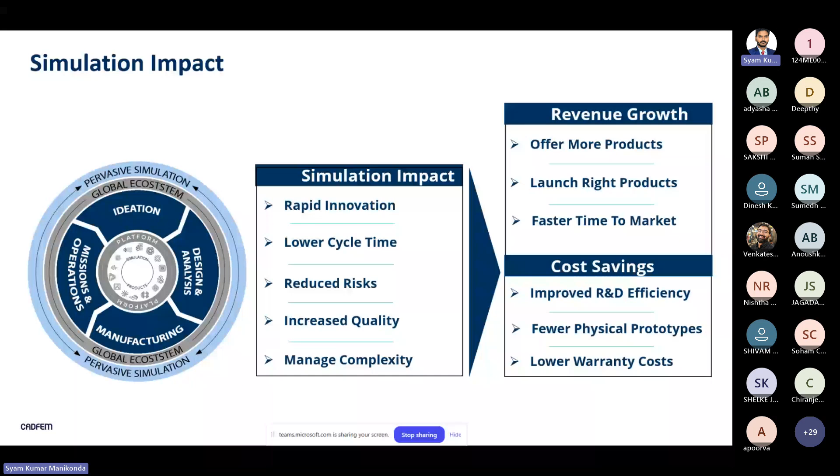You can see the simulation impacts there. The line items show it will help you with rapid innovation, reduce your manufacturing cycle times, and even risks can be reduced. Then quality of your production can be increased, and a variety of complex parts you can manage. Ultimately you will improve your revenue and save money costs incurred in it. These are the basic things you can understand.

And this is another design, a totally new design: the Air Multiplier from Dyson. It's a new design of table fan, you can say it's a bladeless fan. What it does is pull air into the ring and amplify it by a further 15 times, so airflow can be improved, giving strong and smooth airflow. It's an expensive thing because it's a new design and there is no background before this particular design.

So what I'm saying from this slide is that any kind of new design also you can develop using simulation. You don't need a history of the existence of that particular part. You can start doing your product very innovatively without having any previous existence of that particular model.

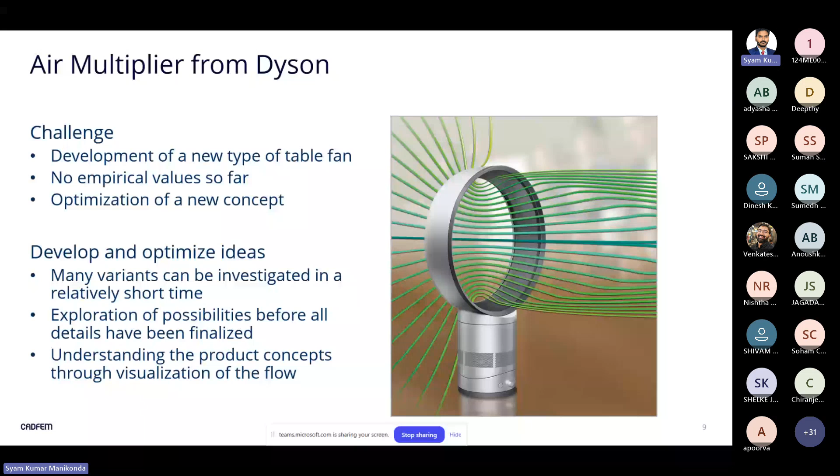Let's say you have a virtual development process. Generally it will have 3 stages. We start with the drafting of that particular design or model. Once you've done the model, you have to do the validation, meaning you need to check whether it is functioning properly or not, virtually, since it's a virtual development process we are telling about. All the things will be done virtually using your simulation platform, particularly Ansys. So drafting and validation.

At the end, you can do the integration also. Ansys is providing the option of integrating your virtual model using your real world data. And these are the tools in your virtual development process. If you correlate this previous slide and this slide: drafting, validation, integration.

For drafting, we have Ansys Discovery. It's a new tool for designing or modeling. Not only Ansys Discovery, we have other tools also: SpaceClaim is another one, and DesignModeler is another one. So we have 3 different tools for drafting your model.

Coming to the solver or validation purpose, different tools are there based on the physics: structural physics, electromagnetics physics, then fluid physics. All those physics-relevant tools we are having. So Ansys is offering solver tools based on the physics of what you are dealing with, and we have the tools for validation. Coming to the twin builder, this is a twin builder which will be used for integration of your virtual prototype by means of real world sensor data.

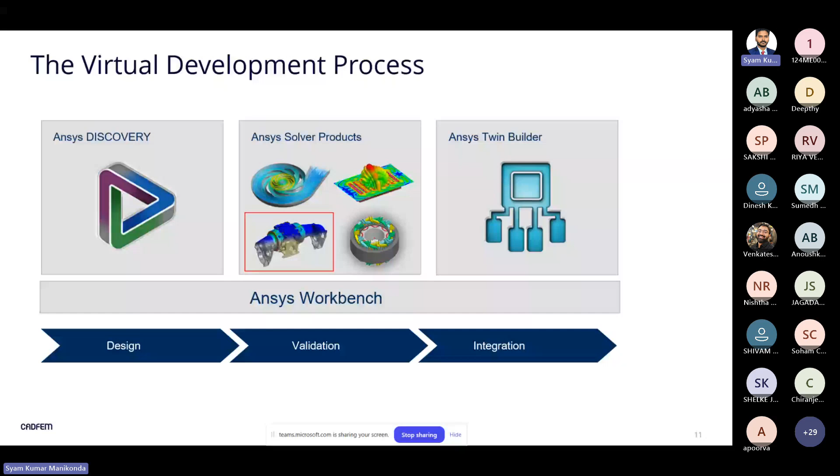So implicit means, hopefully you might be knowing implicit simulation, implicit analysis means analysis or problem duration will be longer, like static problems, dynamic problems, creep problems. All these kind of problems we will say are implicit simulation, implicit analysis. So we could utilize Ansys mechanical for performing implicit structural mechanics problems. Just remember, mechanical is a tool used for doing implicit structural simulations, examples being statics, dynamics, and creep problems.

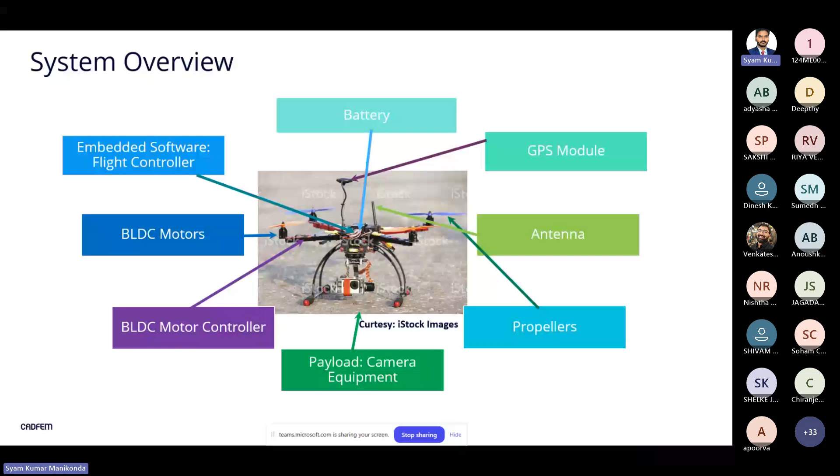But why I'm showing this is because this is an overview of your quadcopter system, but we will be sticking to a different aspect here. There are different engineering challenges you can have while designing a particular drone or unmanned aerial vehicle. Different engineering challenges will be there based on the physics, with respect to body, reliability, semiconductor, sensors, functional safety and reliability.

We'll be focusing on these engineering challenges with respect to structural integrity, so we'll be using our structures. You can have the structure made of different composites, and we could do the aerodynamic studies on that particular structure. But I'm not going to focus on this aerodynamic study and noise this time; a different session will be there on the aerodynamics of this particular structure.

Before going to our main demonstration, we need to cover a few things on finite element method. Finite element method is nothing but a numerical method used to solve a particular problem. For any engineering problem, there are generally two ways of solving: one is the on-paper solution, that means analytical method, using equations and solution methodologies you can perform on paper. But there are many engineering problems you can't solve on paper, so for those kinds of problems we have to use numerical methods, and finite element method is one such numerical method.

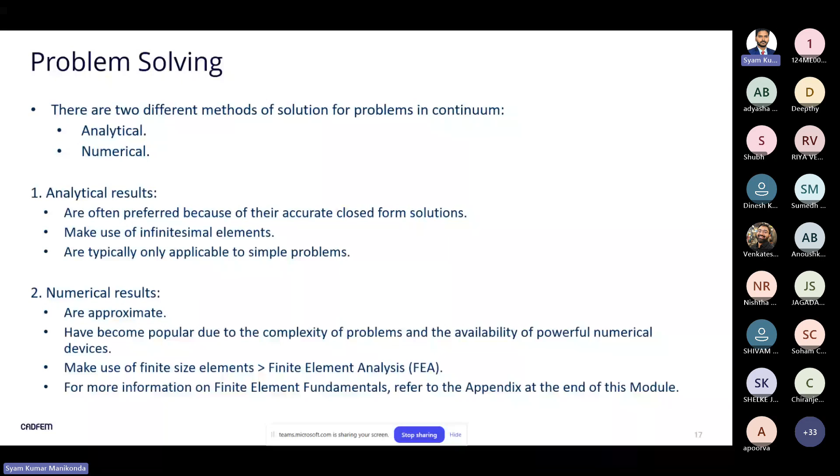So in FEM, what happens? FEM is a numerical method used to solve particularly complex engineering problems, not simple ones. We utilize numerical methods for solving complex problems. Generally, this complexity is associated with respect to the geometry, loading, and boundary conditions. That is the meaning of the complexity of your particular engineering problem.

Each element will be surrounded by corner points, and those points we call nodes. So what I'm saying is, in finite element method, the main point is the entire domain under our observation will be split into small pieces. Each piece will be called an element, and each element will be surrounded by nodes.

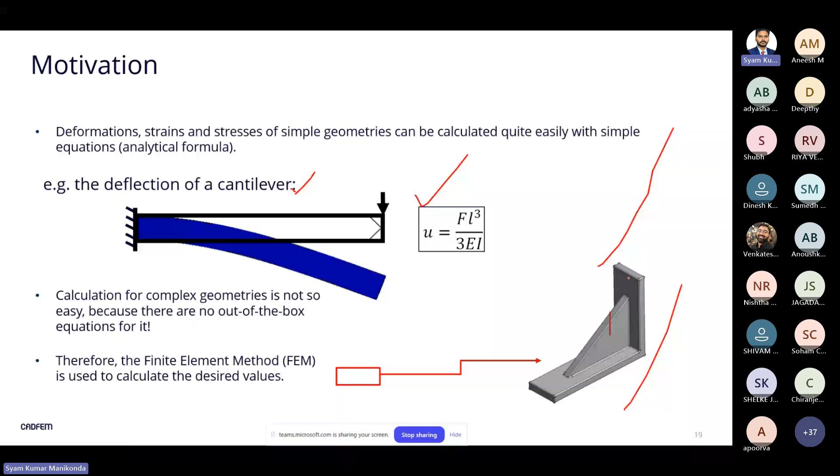So in finite element method, it will have some three basic equations similar to the solution based on analytical method. Even the numerical method will follow the three equations: equilibrium equations, kinematics and material law. That means there will be some relation between strain and displacement, and stress and strain. So equilibrium equations it has to follow, kinematics - nothing but strain and displacement relation - and material law, stress and strain relation.

So when a bar is subjected to force F, we know the elongation formula: elongation is FL by EA. After rearranging a few terms - keeping force on one side and the remaining things on the other side - you will be getting in this form. And from this, EA by L, I can make it as K. So this K multiplied by displacement is equated to force. You need to remember this equation - this is a finite element equation.

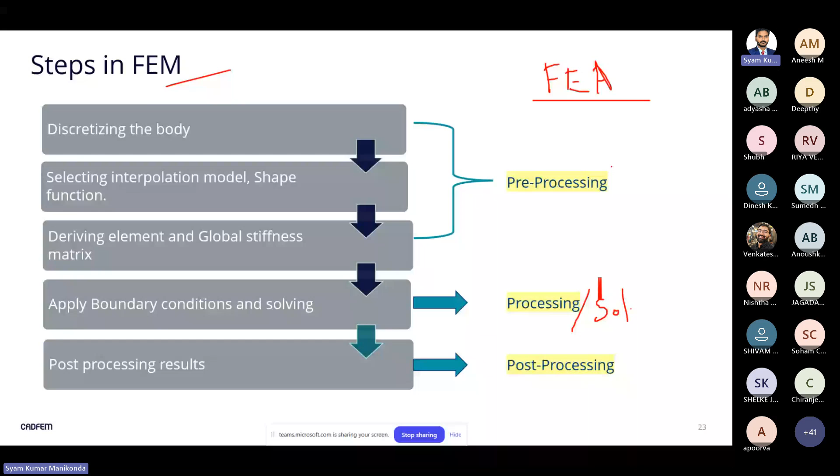Coming to elements, as I mentioned, a problem domain can be split into small pieces, and each piece is called an element. This is based on the geometry of your domain, that is, whether it is a 1D, 2D, or 3D domain. So we will have different types of element terminologies.

So we have 1D beam elements, 2D triangular and quadrilateral elements, and in 3D, tetrahedron and hexahedron elements. Since we are going to demonstrate on a 3D geometry, you should remember these: tetrahedron elements, hexahedron elements, and pentahedron elements, also known as wedge-shaped elements.

So tetrahedron elements have triangular shapes, hexahedron elements are like a cube, you can remember it as a cubical element, and wedge elements. Just focus on these 3D elements.

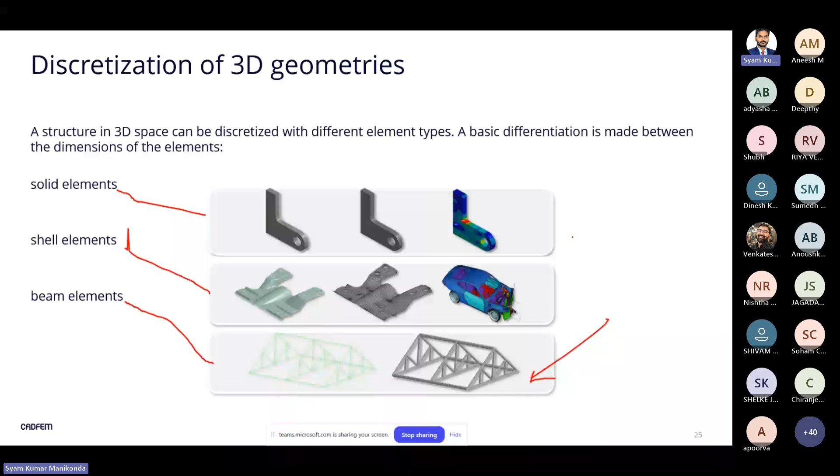There will be some assumptions behind identification of solid, shell, or beam elements. Let's see about those assumptions. Any 3D object can be converted into a 2D object if it satisfies a few assumptions.

Generally, any engineering problem is 3D only, not 2D or 1D. But if it satisfies a few assumptions, then such a 3D object can be treated as either 2D or 1D. So any 3D object can be converted into a 2D object if it follows some assumptions.

When can I say a 3D object can be treated as a plane stress state? If your 3D object's thickness is very small, meaning a thin structure, and the loading is on the plane, like a plate being stretched, meaning the loads are along the plane with no loads perpendicular to the plane, and the thickness is small, then such a 3D object can be treated as a plane stress state.

Stress components perpendicular to the 2D plane are negligible, meaning there are no loads in the perpendicular direction of that plate. In such cases, we can treat that 3D object as a 2D object and name it a plane stress state. Examples of this would be beams, plates, shells, and membranes.

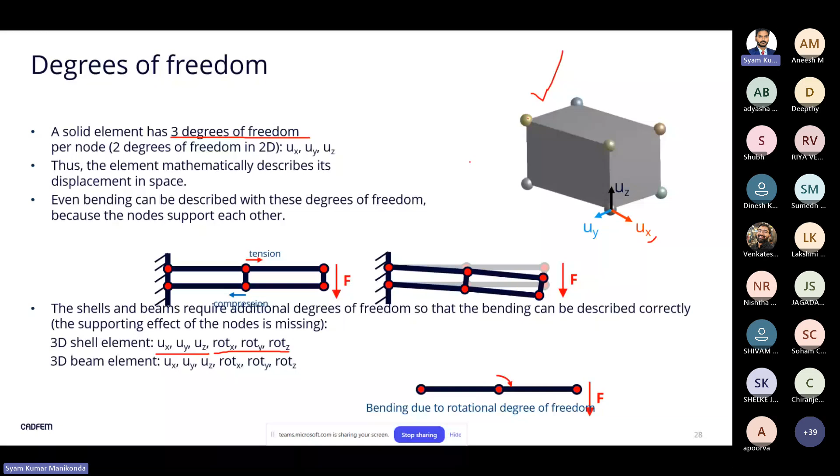Then there are some advantages and disadvantages. Disadvantages means if you have a good hardware, these are not disadvantages. Advantages means any kind of complex geometry can be tackled. Any kind of nonlinearity, whether it is nonlinearity in material or geometry, can be handled. And any kind of boundary condition can be applied. Commercial codes can handle a general class of problems rather than requiring different programs for plane, axisymmetric, and 3D cases. So a good software can deal with any dimension, whether it is 1D, 2D, or 3D. A single software can handle these 3 different domain case problems.

Disadvantages means, the first thing is it is a numerical method based, so FEM is a numerical method, so the solution will be approximate. They are not accurate always, they will be approximate. The solution is numerical rather than analytical. So significant computational resources are required, because if you are having so many number of nodes and elements, then definitely you should be having a good software, a good hardware.

A large amount of input data may need to be stored. Why? Because if you have a large number of elements, you'll definitely need lots of memory to be utilized, and a large amount of output needs to be stored too. That is also one requirement for having good hardware when handling big problems. A simple hardware setup cannot handle a big, complex problem. That is what the disadvantage means.

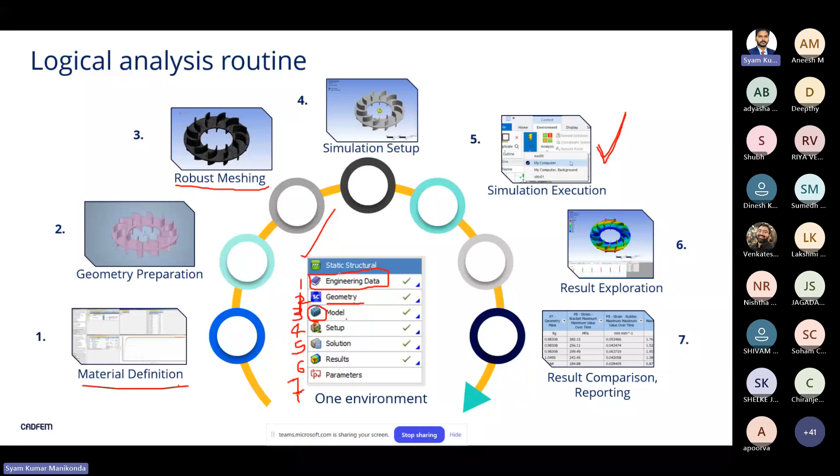Now I'll show you the same routine in a different view. So what we will do is call the analysis. We have to call a static structural analysis and follow all these cells correspondingly. For this I will be going to the Ansys workbench, open it, and I will be having a project page.

There I have to identify what type of analysis I'm doing. Based on the mechanics, temperature involvement, and static and dynamic cases, accordingly I will identify the type of analysis. That can be done using the Ansys workbench project page. Then again, material definition is the first cell, and geometry import or geometry creation is the second step.

Then file management. Once you input the material, once you call the geometry by means of importing, then the CAD model is ready. Once the CAD model is ready, we will be jumping into the Ansys mechanical, that is the third step, the third cell. So the first cell is material definition, second is geometry import, and third is the model.

So if you open the third one, the model, you will be redirected to Ansys mechanical. There you have to assign the material property. Earlier you defined it, but you have to assign the materials corresponding to the parts of the geometry. If you are having any thickness, you have to mention it here. If it is a 2D geometry, you have to mention the thickness here.

Then some simplification on the geometries may be required, such as defining point masses. Sometimes connections also you have to provide, so joints and contacts are called connections. Then again discretization, that is nothing but the meshing. Just remember, discretization means it is nothing but the meshing.

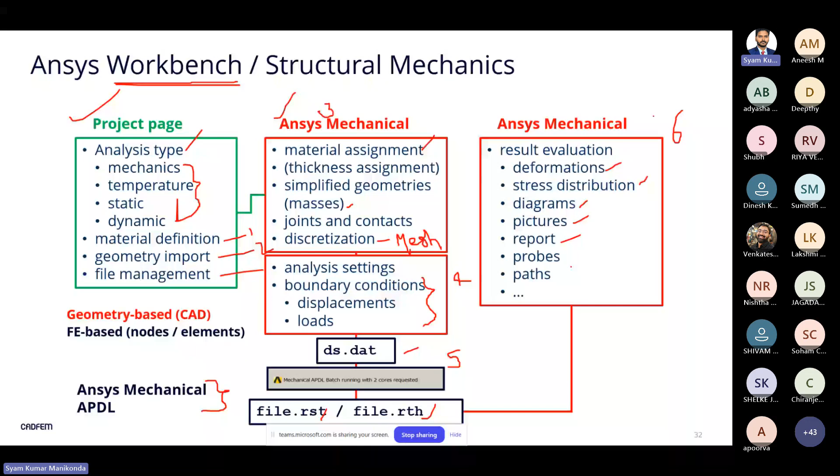Then coming to the different types of structural analysis that we are having. As I told you, structural analysis has two varieties: implicit structural analysis and explicit structural analysis.

In the same way, depending on the time frame of the problem, there are different classifications: statics problems and dynamics problems. Statics problems means the loads will not vary with respect to time, and dynamics means the loads on the structure will be varying with respect to time. So statics does not depend on time, whereas dynamics, the loads will be depending on the time.

Again, based on the linearities and non-linearities involvement, we can classify linear and non-linear. Coming to dynamics, all the cases will be mostly linear dynamics cases.

In dynamics cases, again, based on the domain - frequency domain or time domain - we are again having a split. In dynamics, what we generally have is displacement, velocities, and accelerations. If some certain assumption is there on those three things, then that domain we say is a frequency domain. If that assumption is not there, we say it is a time domain.

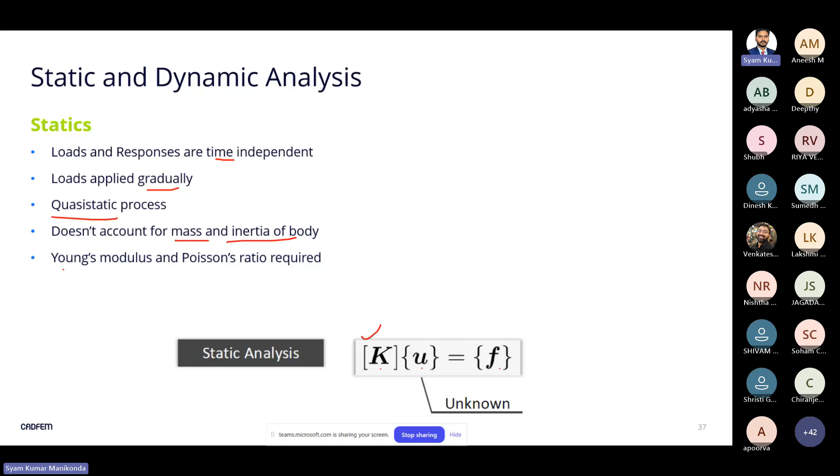So what are the features of this static analysis? Loads and responses are not depending on time, loads are applied gradually in a quasi-static process, and it does not account for mass and inertia effects. From the equation you can understand there is no involvement of density or mass - strictly mass and inertia of the bodies are not required in static analysis. Material properties will be Young's modulus and Poisson ratio - these two things we definitely need to include. So that is about the static analysis.

Coming to the dynamic analysis, the equation is not simple. Earlier if you see the static analysis, it's a simple equation, but here in the dynamic analysis, it's not a simple equation - the complete equation is this one.

So it will have masses, it will have damping, along with stiffness, displacement and forces. It will have mass and damping matrices. That means inertias and damping forces will be involved.

If you see the forces, since it is a dynamic case, the loads will be depending on time. That's why the force has dependency on time. So in a dynamic situation, loads will definitely be depending on time.

Mass and damping of the system is considered, that is m into u double dot plus c into u dot. So that is the mass and damping of the system. Density of the material is required because mass is existing. That's why density is required in dynamics problems.

Problems can be classified in two ways: frequency domain and time domain. Frequency domain means you will be having some assumption on displacement, velocity, and acceleration. That type of assumption will not be there in time domain problems.

In frequency domain, we have different cases: harmonic, random, and response spectrum. For all these cases, you first need to perform the modal analysis, that's the free vibration analysis you have to perform.

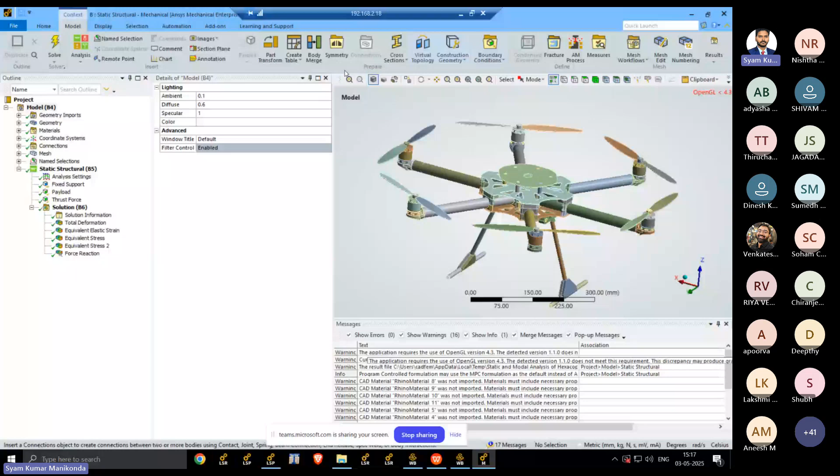So this is an object, and we have to perform the static structural analysis. Those load cases I already showed you in the slide. Let's see how to create this entire environment - I'll show you. Let me close this. Already I have solved the problem, I'm just showing it to you. Again I'll construct everything from scratch.

So first of all, what we have to do is call Ansys structural - sorry, Ansys mechanical. We need to open Ansys mechanical. So once the software is installed, you need to open the workbench.

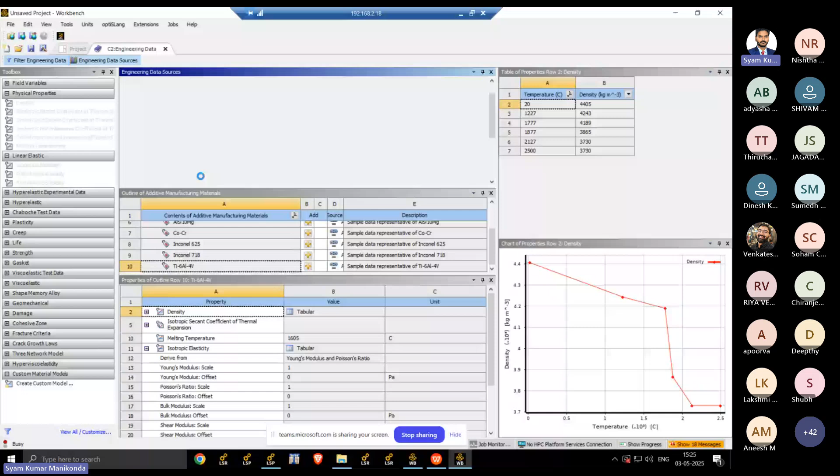Then coming again to composite materials. Even composite fibers are there -- different e-glass materials, epoxy, laminate materials. In the composites material category, you can see around 30 different types of composite materials.

So what you can do, if you want to go with carbon fiber, you can simply bookmark it, and that will be taken to your engineering data.

Again, in the same way, if you are doing any LS-DYNA problem, or maybe an explicit case problem, accordingly explicit materials are there -- you can see the materials for the library of explicit materials. In the same way, fluid materials, thermal materials -- all those materials you can simply select by means of the plus symbol here. Accordingly you can utilize the variety of materials existing in the Ansys libraries.

And again, Ansys Granta is a different library -- you can see the name mentioned here, it is a sample thing. Ansys Granta offers you 700 libraries of material data, but right now it is a sample data that has been added in the engineering data here. So Ansys Granta material data is a sample data given here.

A wide variety of industry available materials can be obtained from Ansys Granta, and here we are provided with some sample data -- 41 different sample materials are there from Ansys Granta. If you have Ansys Granta with you, 700 varieties of libraries you can access, and there is a separate selection criteria accordingly. Likewise you can identify the different classes of libraries.

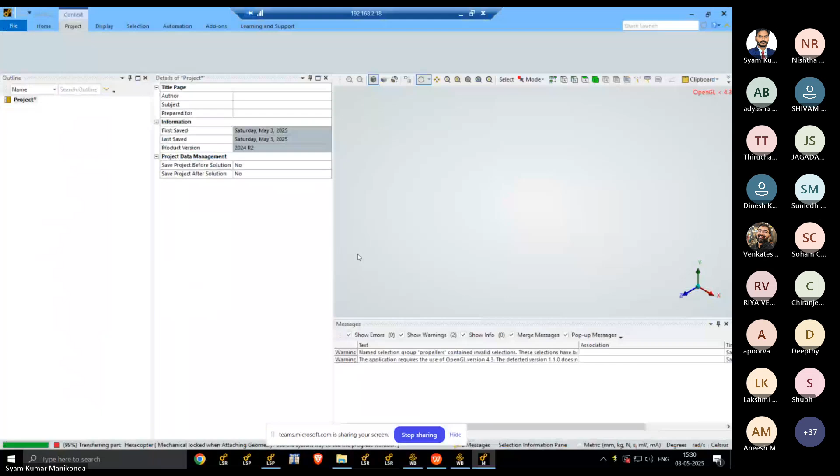Since it is a big geometry, it is taking some time to convert it into the compatible way. Now the geometry has been imported here. Right now what I'm using is the 2024 R2 version.

Before I do anything, I'll reset the entire layout, because right now whatever layout you are watching is customized based on my work. I'll go to the reset layout option existing in the home ribbon. This is how your system will look once you open Ansys Mechanical - once I reset the layout, you can see the generalized view.

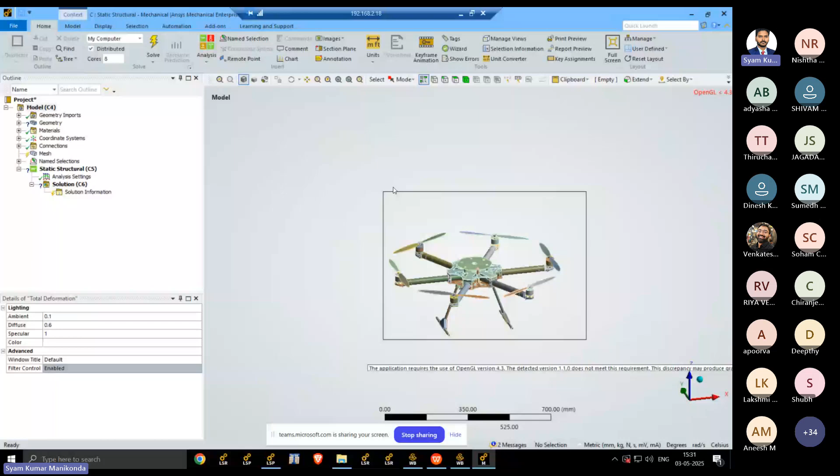Now if you see the outline from the left side, the details of your model - particularly how many parts are there, what materials you are having - those things you can access from the left side, the project tree. So we say it's a project tree. Now you have the model.

Now step by step, if you see geometry, there is a question mark symbol. Let's see what this question mark symbol means. Whenever there is a question mark symbol, that means we need to provide some data - something is missing, that's why the question mark is appearing. Let's see what it is.

Now I will open the geometry and you can see so many parts are there in this assembly. Everything is having a question mark - let's select the main body. The corresponding details of the main body you can see at the bottom. The main body is having so many parts inside - few are having question marks and few are having tick marks, green color tick marks. So what I will do is give each and every part the aluminum alloy material.

I'll select each and every part. For multi-selection from the keyboard, you can use the shift option. So I took the first part, and before selecting the last part, I'll use the shift key from the keyboard and select the last one. So all the parts have been identified. You can see in the details of the multiple selection, something is missing here - that is the material assignment. So material assignment - I have to give the aluminum alloy.

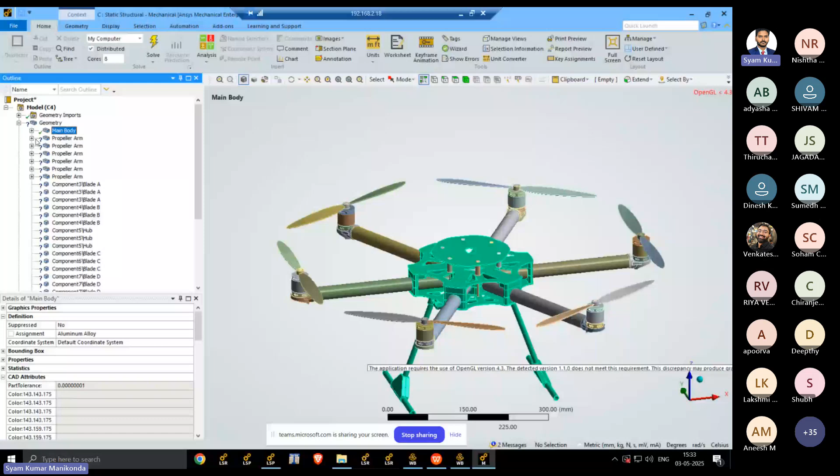Okay, so now you can see there is no question mark in the main body. In the same way, I have to give the remaining parts the aluminum property. So again, the propellers, all the parts, I will take and assign the material as aluminum alloy. Then again, the propeller arm, I'll select each and every part and take it as aluminum alloy. Likewise, I will assign the material to each and every part using the aluminum alloy.

All the parts aluminum. Again, propeller arms, aluminum alloy. So what I am doing is giving the material assignment. Earlier, I gave the definition of the material, but right now for every part I am assigning the material. That is aluminum alloy I have taken here.

And again, hexacopter, for these parts I'll give the aluminum alloy. Okay, now you can see the geometry. The symbol is updated from question mark to green color tick mark.

Then again, materials. We know materials, we have aluminum alloy material. Then coordinate system, no need to worry, don't disturb it.

Now coming to the connections. Now you know all the parts, you can see they are connected with each other. So the propellers, the shaft, motors, arms, frames - all those things are, it's a big assembly. Now I'll show you one thing here.

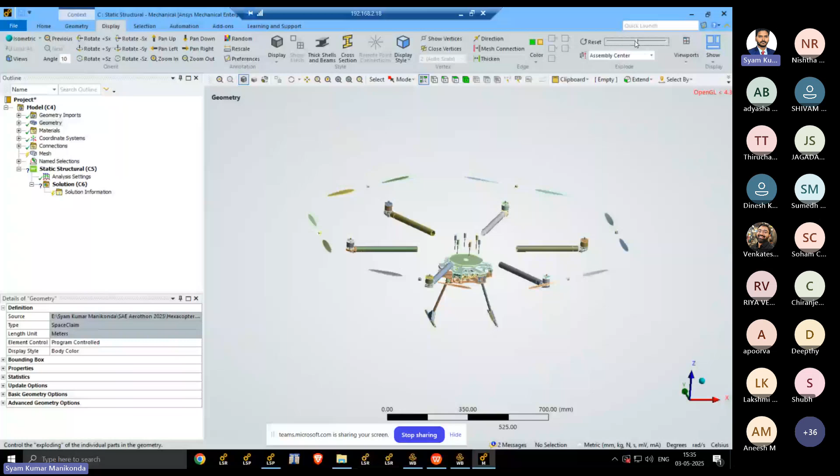For simplicity's sake, I will consider all the contacts as bonded contacts, that's a linear contact. So all the contacts between the parts I will be considering as bonded contact. And that is an automated step actually - once you import the geometry, the connections will automatically exist, and all these connections by default will be bonded only.

So connections, hopefully you might have understood - all the types will be bonded contacts. All the contacts will share the bonded contacts, but it is by default, I didn't give this. So it is by default, automatic connections will be there. I'm just not disturbing the connections between each and every part. All the connections are bonded contacts only.

Now you see aluminum, we have to take the aluminum, but right now I am just using aluminum alloy since it's readily available with me. So aluminum alloy I have taken. Then what is the hexacopter mass? So 2.55 kgs is the mass. So I have to ensure the entire hexacopter has 2.55 kgs.

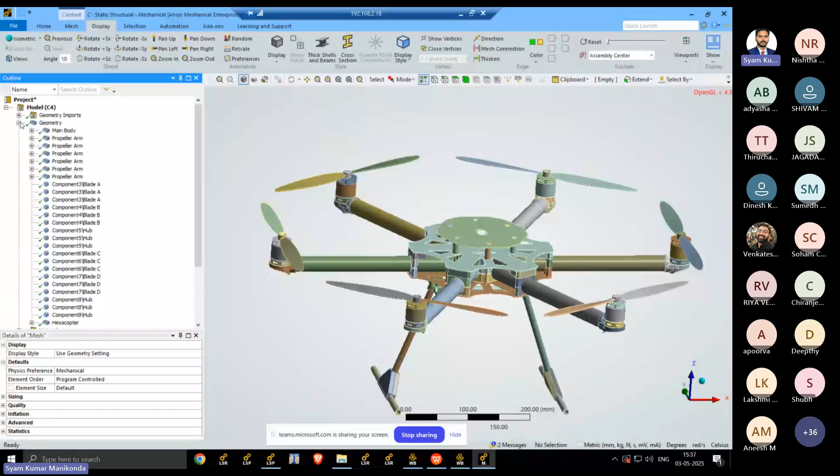So I'll just check what is the mass of it. Since it is aluminum, it will be 2.55 kgs. Now let's see what my geometry shows. I'll go to the geometry. Now you see geometry - in the details of the geometry, you can access the properties. Now you can see the mass is 2.5509 kgs.

So aluminum alloy also I can take, because whether aluminum or aluminum alloy, the mass should be 2.55 kgs according to the problem description. If it is some other material, then the mass will vary accordingly. So right now we don't need to worry about whether it is aluminum or aluminum alloy. Mass is 2.55 kgs, so it's done.

Then again, payload mass will be 12 kgs. So payload mass I have to consider as 12 kgs. I'll be converting that 12 kgs into force, so 12 kgs into 9.8, or otherwise 10 I can take. So 120 newtons will be the payload.

Then again, contacts will be linear contacts - I told you, bonded contacts. Ansys by default will create the bonded connections between them, so all those connections are nothing but linear contacts. Then coming to the mesh, I have to give the body sizing of 4 mm. So body sizing of 4 mm I have to give.

In meshing, there are two types of controls: global mesh controls and local mesh controls. By directly selecting the mesh, you can see the details at the bottom, and all these controls are called global controls. I am not going to touch the global controls right now because the problem requires body sizing.

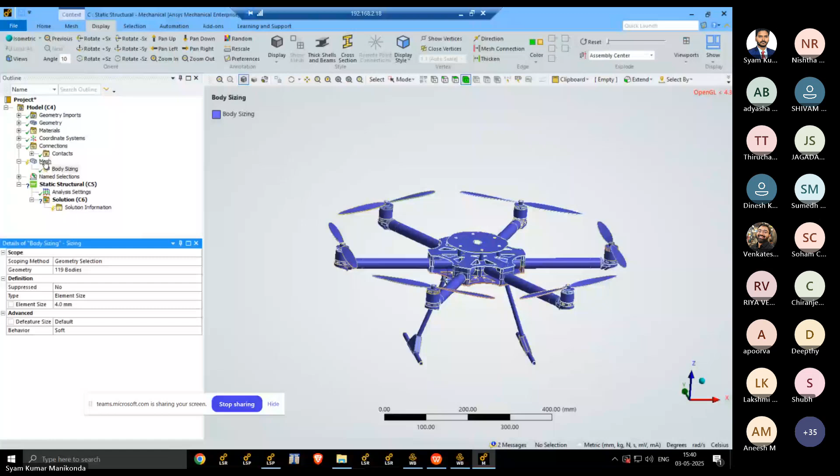There is some problem now. You see only a few parts have been meshed properly. According to the problem description, by simply applying body sizing of 4 mm, it should mesh the entire machine. But right now a few parts are not able to mesh properly. What could be the reason?

Any guess? You can text it in the chat box, I'll read it at the end. So what could be the reason behind not having the mesh properly? There is a failed mesh, and we can find it on the geometry in this GUI. What could be the reason? You can text it in the chat box. So, all the parts we are not able to mesh.

There are different possible reasons for not having proper meshing here. One reason could be an improper model. Yeah, we've got one response — it says the geometry where it failed is complex, or the mesh size is too large. Yes, the geometry is complex, you are saying, but what I will tell you is that you did not do the CAD modeling properly. That's the best explanation I can give. This geometry is not able to give proper meshing because the geometry was not done properly.

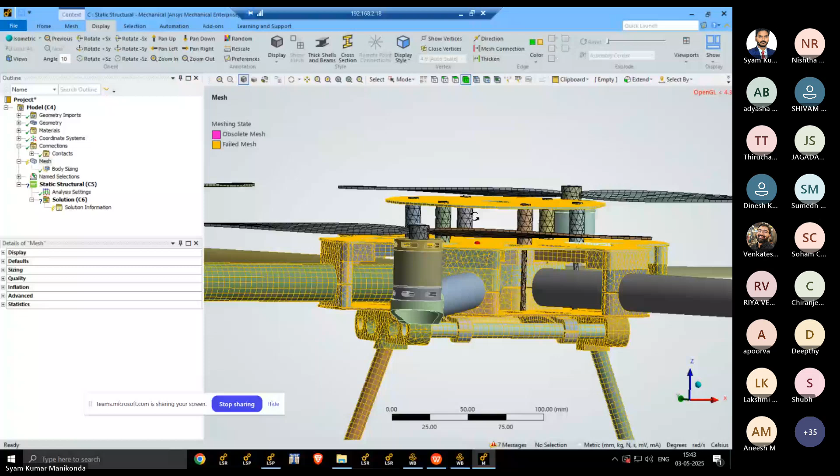So this is one problematic area we are having. I'll just show you the geometric view.

Now if you see, this is one thing. It should be a perfect circular cylinder, but instead, what you see is not a single circular cylinder. It has some unnecessary edge feature, or extra feature is there, which is making my mesh ill-conditioned. We are unable to generate the mesh properly, because of the existence of this particular geometry.

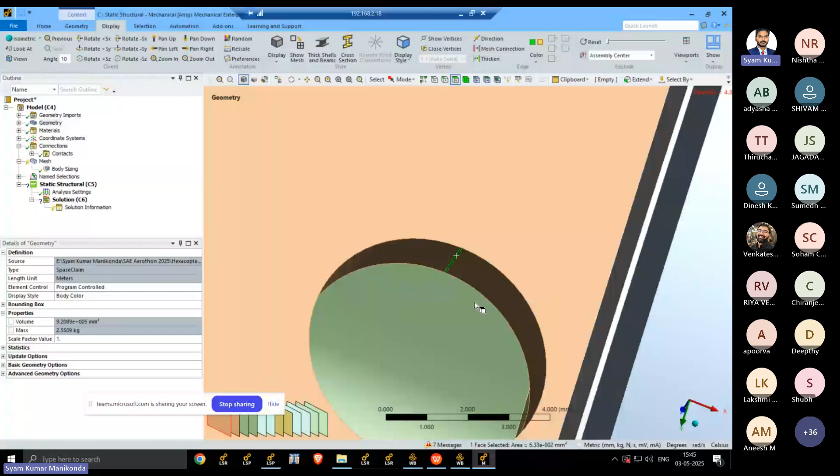That's why, while creating the geometry, you need to ensure this kind of unnecessary geometries should be avoided—duplication of geometries or uneven duplicate features like extra edges, extra points, extra faces, extra volumes, interpenetrations between the parts. All those things you need to avoid. Then only you can do the meshing properly. So you need to be more cautious about creating the geometry. That is one aspect, and one more aspect is...

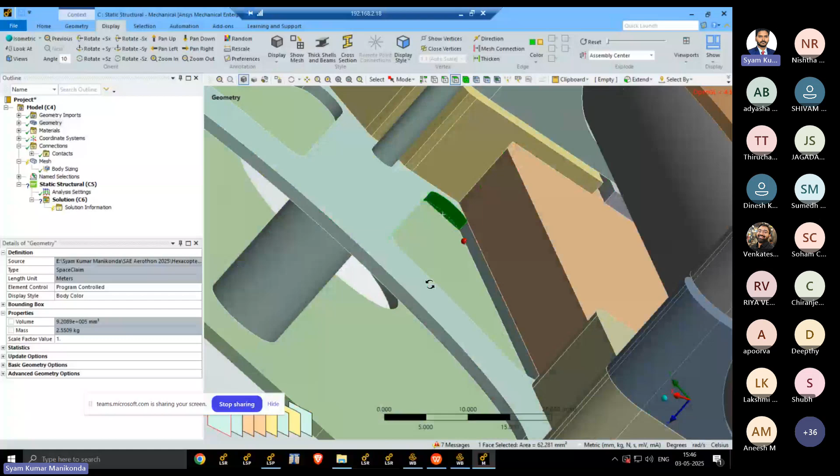There is one more difficulty in this geometry. I'll just show you. Now you can identify this is half of a half circular section, but now you see it is not defined properly here. There is some geometry misalignment here, so it is not having the proper geometry. That is also one mistake from the geometric model.

Because of such things, you are having some errors in generating the mesh. That's why you're unable to do the meshing here. So what I'll do is selective meshing here. I'll go to the body selection tool, select this object, and operate generate mesh on the selected bodies.

Now you see, earlier there is a problem on that particular part. Now you can see there is a generated mesh on that part. Then again, coming to another body, I'm selecting it, right clicking, and generating mesh on that particular body.

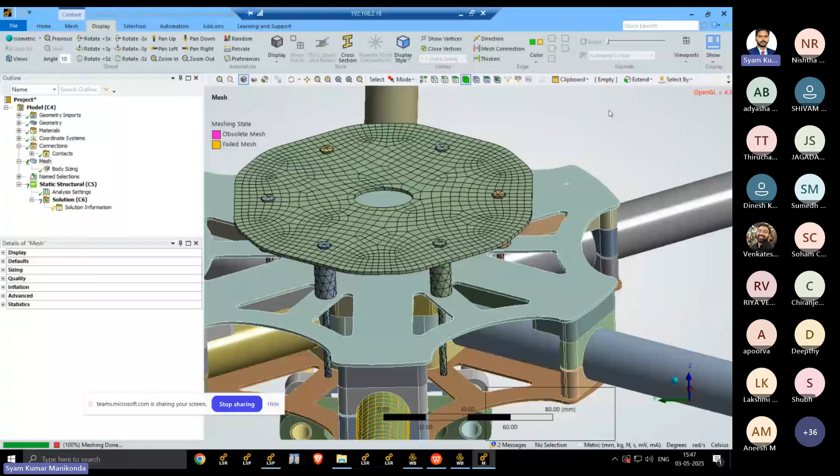See, it is not giving you the meshing here. Earlier we can see the generation of mesh on this part, but now on this geometry there is no mesh generated. That's why—because I already showed you something is wrong with the geometry.

So what I'll do is use the virtual topology. I will activate it here. Why? Because one thing you could do is go back to the previous steps—in the geometry step, go and rectify the geometry. Otherwise, one more option is using the virtual topology. So using virtual topology, I can also fix it. Virtual topology is another way of tackling this error in the mesh.

So I'll activate virtual topology, and highlight where this problem is happening. Yeah, this one. I'll go to the selection on this side, and from the keyboard, Ctrl+M, to create the virtual geometries.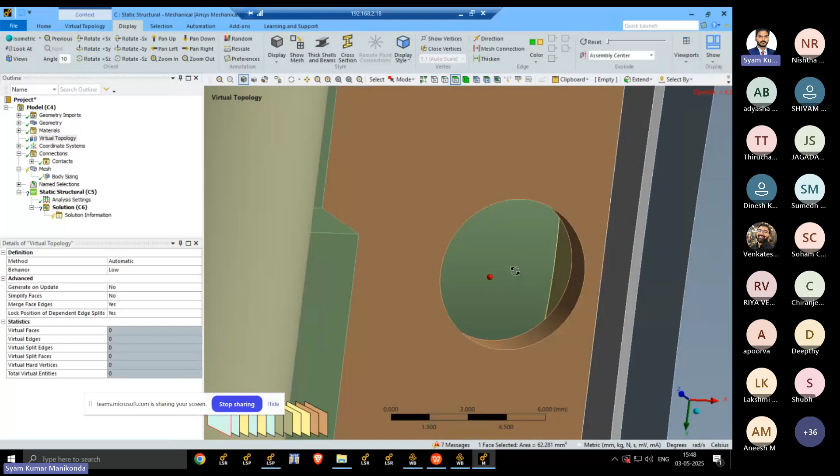So by using virtual topology, you can somehow avoid this kind of unnecessary features and uneven geometries. I'm selecting these two surfaces, and from the keyboard, Control M. Now you can see a virtual surface has been created by removing the unnecessary features.

So what I did: I selected the two faces nearby and opted for Control M from the keyboard. Control M means it will merge the two surfaces, making a single virtual cell. In the same way, I have to operate on this surface also.

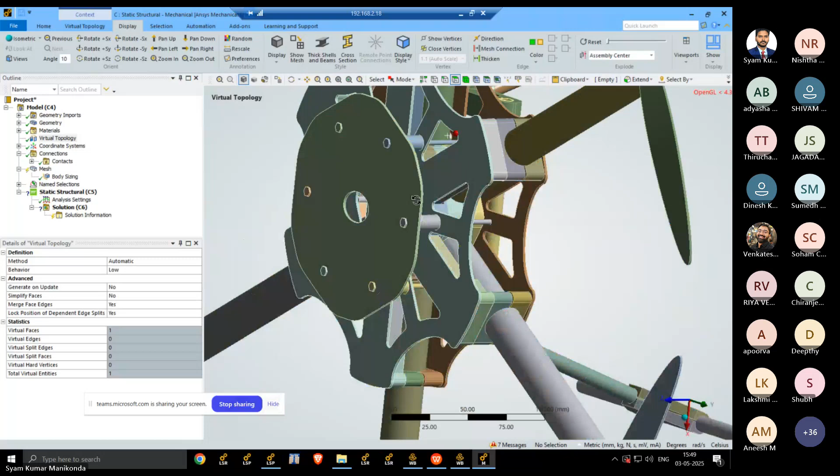Virtual topology on the ill-conditioned area, that is this one. Yeah, here it is. So I have to select two surfaces. I'm in the virtual topology, face selection tool is active—first surface and the second surface. Then Control M. Now you can see one more surface has been created, and that differently colored thing shows another virtual cell has been created.

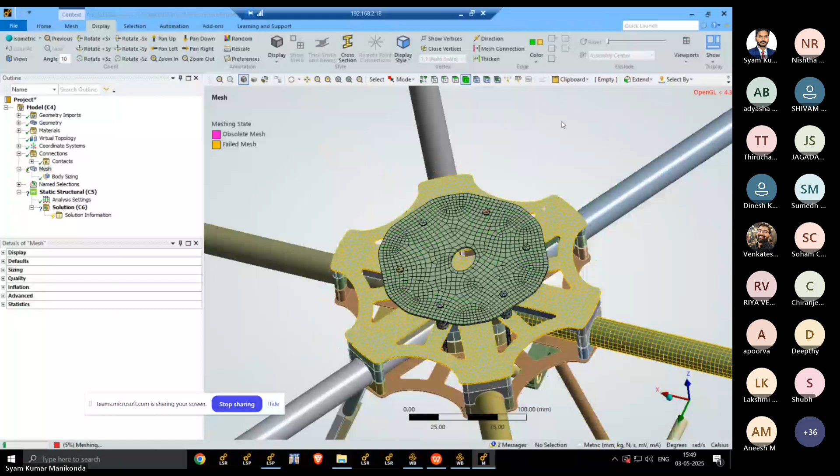Now you see, by using the virtual topology, this is another way. The best thing is to go back to the geometry phase and sort out those ill-conditioned features, remove them, and come back here to mesh it accordingly. Right now what I am showing you, virtual topology, is another option. Without going back there, you can do the geometry simplification here. So wherever the problematic area is, I'll identify it and apply the virtual topology to have the meshing for that.

Even for this geometry, I will try to generate the meshing on the particular geometry. See, now it is there, now this one also. So what I'll do is remesh it entirely and see if it is done or not.

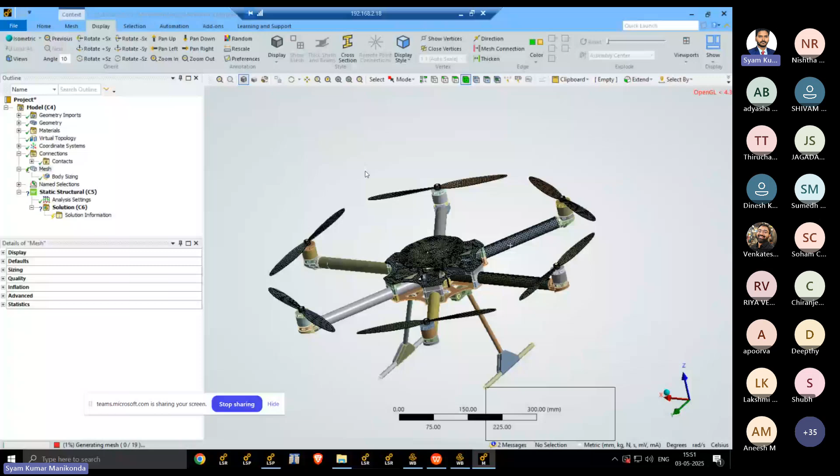But a few areas are having some troubles. So this is another area. Now you can see, now you can understand, so this surface - I will select the two surfaces, and Control M is for the merging. Again, same, this one and the other surface. Control M, merge. So I just merged all the relevant surfaces, and I'll see whether meshing is happening or not.

Now there is some issue in the geometry. Let's see on the other parts.

Now in the same way, likewise, you have to identify all those parts and generate the mesh on the particular bodies. Since the geometry is big, that's why I'm doing all these things. So geometry simplification by means of virtual topology I'm doing, and accordingly, for each and every part I'm generating the mesh on the particular parts.

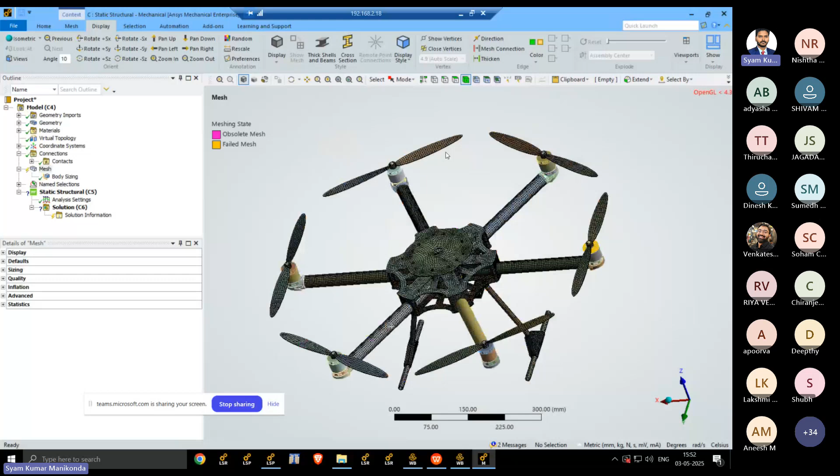Once it is done, once all the meshing is done, now you can see the green color tick here. Once all the meshing of the parts is done, then only you can see the green color tick symbol. Right now we are unable to see it because something is wrong with the geometries of this particular motor. Done.

So on this motor there is some problem. Using some virtual topology we can avoid that. Anyway, right now we don't have that much time to show you rectifying all those things. I'm just showing you virtual topology. By means of virtual topology, you can avoid, you can do such things.

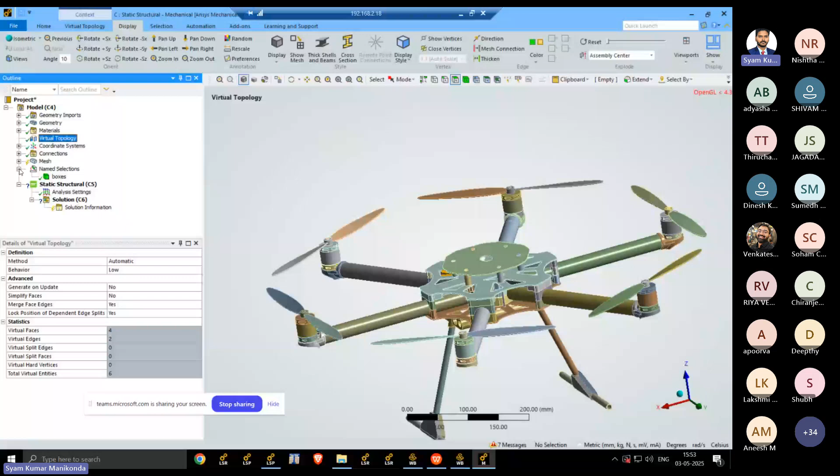Now I'll go back to the other step. The meshing part you can do it later. So by means of virtual topology, you can avoid such things. Likewise, for each and every part, you can generate it wherever there is a problem. You can go and generate on a particular part by simply selecting, right-clicking, and generating mesh on the particular zone.

Now you see whatever mesh is generated, you can see the element counts here. That can be identified by selecting the mesh, going to the details of the mesh. There you can see the node count and element count. Now you see show detailed statistics. Now here I am just selecting the Yes. Whatever the generated elements are there, that data you can see here.

So you have 10-noded tetrahedron elements of 56,000 and 20-node hexahedral elements of 16,000. Wedge shaped elements are there, 15-noded wedge shaped elements.

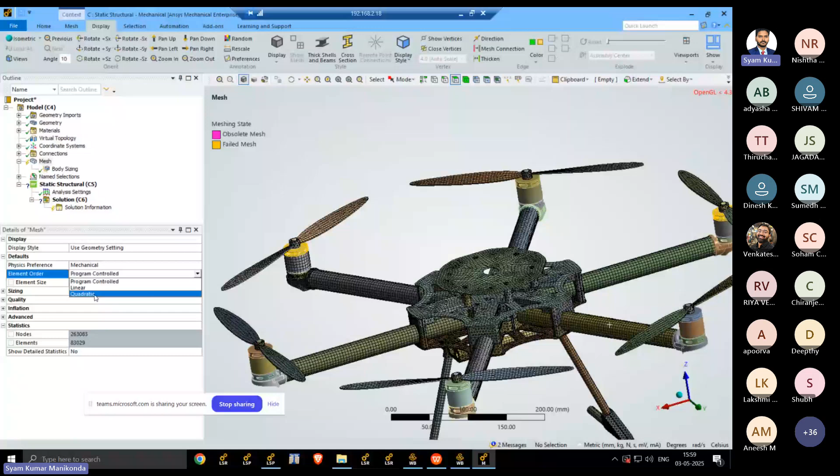If you generate it - anyway right now we are having some errors because of problems in the geometry, I'll try to generate it. So I'm generating the linear elements right now, and now you can understand what could be the variation of elements and nodes.

There won't be any change in the number of elements, whereas you can control the number of nodes here. Earlier with the quadratic program controlled option, you had more than 2 lakh nodes. Right now, if I switch to linear elements, you can see the reduction in the number of nodes. So in this way you can control the number of elements and number of nodes.

If you want to see the number of elements and nodes - now I've switched to linear elements, that's why the number of nodes have been reduced. Earlier it is a 10 noded tetrahedron element, but right now because of the linear elements existing, you can see the 4 noded tetrahedron. So by this number of nodes also you can identify whether it is a linear element or quadratic element. That is about the statistics of the mesh.

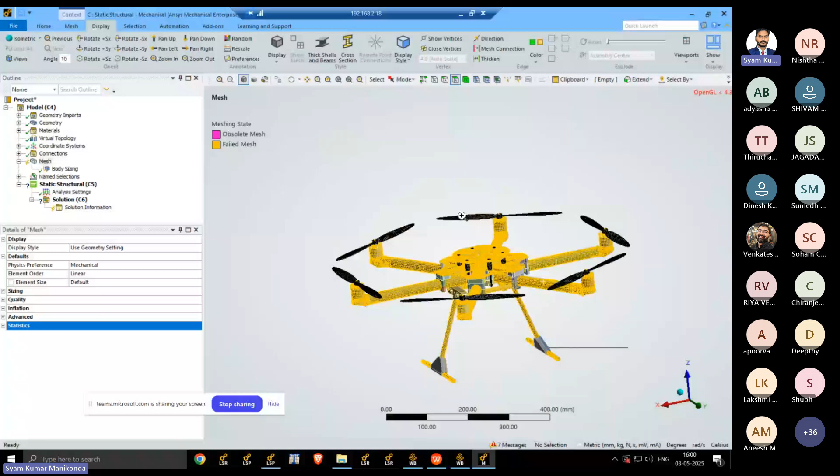Right now, I already told you why the mesh is not having proper orientation here - because some included geometry is not proper, that's why we are unable to see the meshing properly. I already told you how to avoid those things. You can utilize the virtual topology, otherwise you can go back there and do the modeling properly.

Okay, now coming to what I'll do, I will just set up each and every step. Right now I have the already solved geometry, so I'll switch there and show you the results.

Okay, now meshing is not done properly, because I told you what is the problem. Now coming to...

Boundary conditions. So for boundary conditions, you can see thrust force of 60 Newtons on each motor I have to apply.

Okay, so I'll do that first. Thrust force 60 Newtons, just... a time check, it's 4 o'clock. Yeah, we've got another 40 minutes or so. I'll do it quickly, within 30 minutes we can close it. No issues, that can be done. No worries, take your time, just wanted to give you a time check, nothing else.

Sure. Thrust force 60 Newtons on each motor I have to apply. I'll do that one.

Now, where is the thrust force I can apply? Okay, each and every motor, the support of that motor I can select, and there I can give the support for the thrust. So what I will do, I will insert...

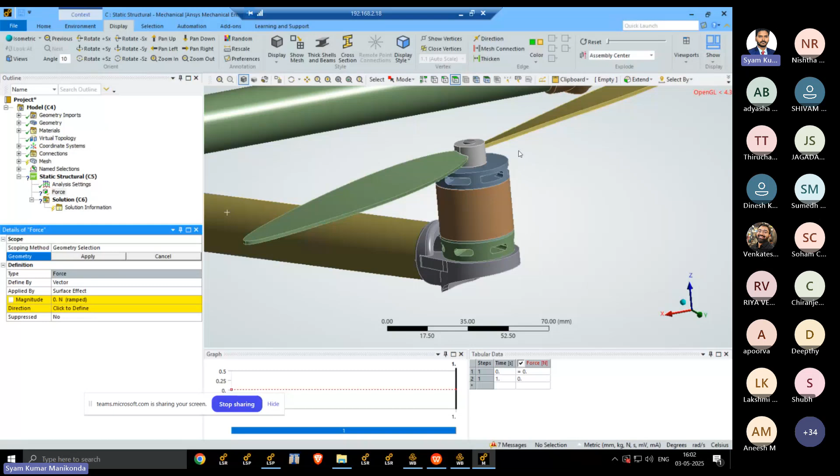I will insert a thrust force, so that means force I will select. Here what I will do, I will select each and every geometry where the thrust force is generated. We know already thrust force will be generated from the motors when it is rotating. The thrust force will be generated, so the effect of that thrust force can be transmitted to the base of that particular motor.

Okay, so this surface - these kind of surfaces I will select, and to each surface I will give the 60 Newton thrust. Just to confirm again, 60 Newton thrust on each and every motor. Okay, so one surface I've selected, and in the same way all the six supports I will select - bottom of the motor.

So two surfaces, 3, 4 surfaces - if you have a quadcopter, then 4 surfaces you need to select. Since I'm having a hexacopter, so 6 surfaces I will select.

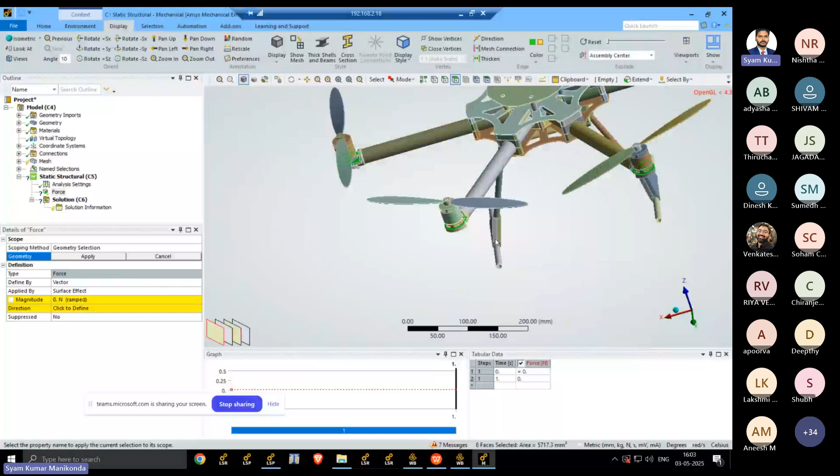So 6 surfaces I have selected, and I am giving the force using component form. You can see z direction I have to select - z direction is the upward direction. The thrust force will be in the z direction, so I'll give the component of 60 Newtons on all those motors.

Now you can see the direction of the thrust force. The thrust force is acting on the bases of each and every motor - so this is the surface, and on the surface the thrust force is acting.

Okay, in the same way I have to give the payload. So what is the payload here? Payload force is 118 Newtons - that means 12 kgs payload I'm having. So 12 kgs multiplied by gravity, it will be around 118 Newtons. So 118 Newtons payload I have to provide.

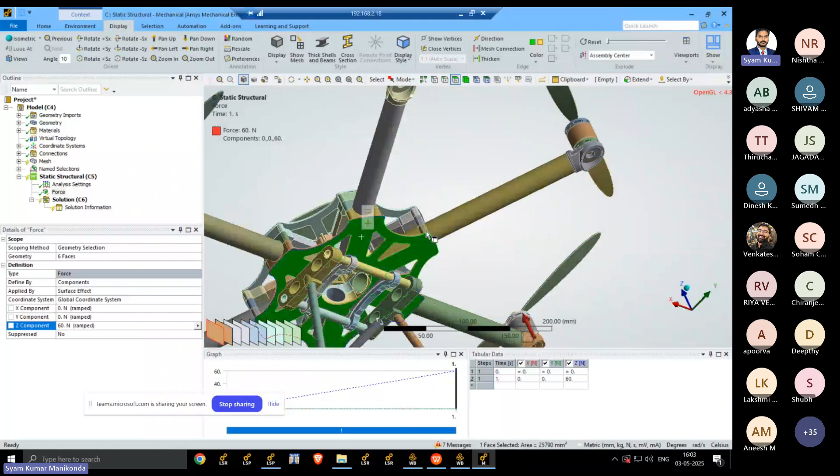To the bottom of the structure, this surface I will select, and on that surface I will give the payload. It could be a camera, it could be any other particular payload. Generally it will be kept inside this circular region - circular space we are having - so in this space the payload can be arranged, and that effect of the payload can be transmitted to the surface of this one.

So on this surface I will give the bottom payload - downwards payload force I will give. I've selected the surface, and I'm inserting another force, that is the downward payload force. Again, that will be by means of components, and that will be in the negative z direction - so z direction I'm giving it as minus 118.

Now you can see the direction of that particular 118 Newtons - that is the payload. The arrow, you can see the red arrow, so that is 118 Newtons, it is in the downward direction. So thrust force is in the upward direction, and payload will be on the bottommost, downward direction.

Okay, so each and every motor is generating 60 Newtons, and bottom payload will be 118 Newtons. Just remember, each and every motor is having 60 Newtons, so 60 Newtons multiplied by all the 6 motors, so that the payload can be taken to our whatever the desired elevation - you can generate the thrust force accordingly. Now one is the thrust force, I'm renaming it THRUST, and this is the payload.

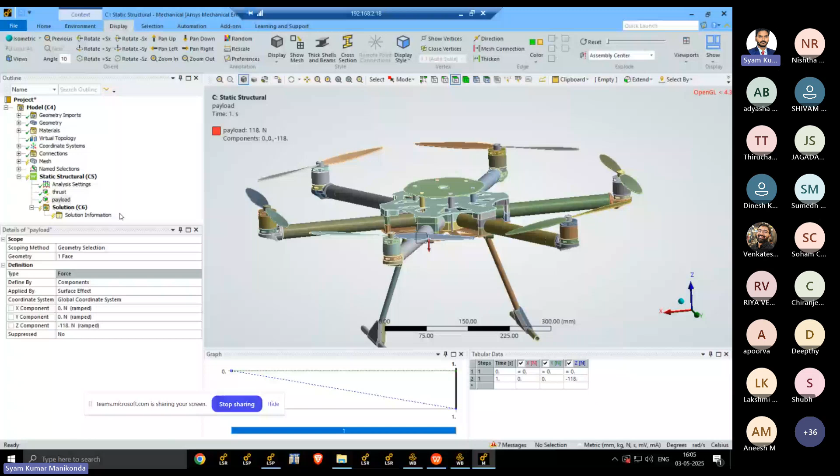Okay, this is the thrust force and this is the payload. Now what else do we have to give? So loaded boundary conditions I have to give. Now what else? The displacement boundary conditions I have to give. Let's say it's a static structural analysis.

So I will consider the bottommost touching points. This surface and another surface I'll select, and I'll give the fixed supports for those two surfaces. So fixed support I'm giving, I'm inserting fixed support. Those two surfaces have been identified and selected. So that is about the displacement boundary condition.

So with this, my entire steps are done. You can see the green color symbols, so geometry is done, materials uploaded. Then again coordinate system, connections, all are linear connections, and meshing is not done properly because there are some problems in the geometry. Then again thrust force, payload force, fixed supports.

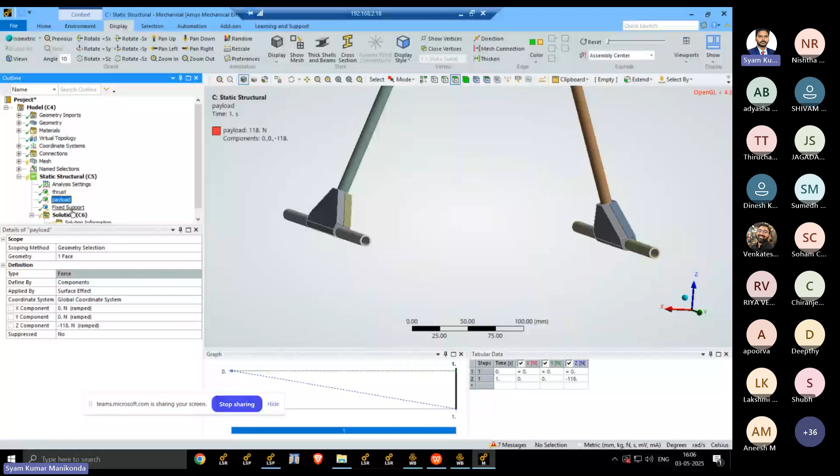All these things have been established. Once you have a proper meshing, then you can go for the solve. Right now I don't have the mesh, and I don't have time also to mesh each and everything. So what I'll do, I'll stick to the already developed model with me.

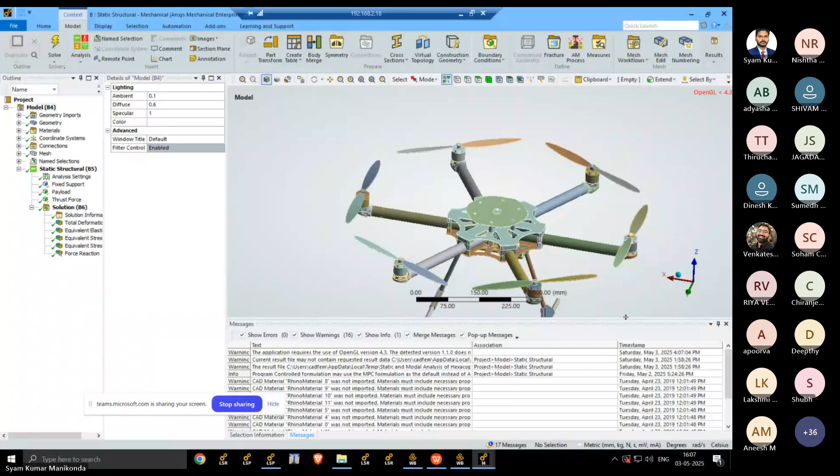You can see it here. I have a good model with me. It is not having any such issues. So you can see geometry is done. Geometry green tick, materials green tick, connections, mesh is done.

You can see, so this is the mesh I'm having, and you can see the meshing here. So body meshing I am having. Now you can see the statistics. In the statistics, if you see, it is having 1,13,091 elements, and nodes also you can see 3,31,000. And you know, more number of nodes compared to the number of elements. That means we are having the program controlled element order.

That is, by default it's a quadratic. So quadratic elements we are having, that's why more number of nodes compared to the element number. Now you see what could be the fixed support we have given, payload we have given, thrust force we have given. Okay, so once you establish all these things, once meshing is done, now I'll remove all these things.

Once you do that, once you solve it, what you have to do, for solving you can do this. I'll just remove the generated data. Once you establish, once everything is done, green mark is there, now you solve.

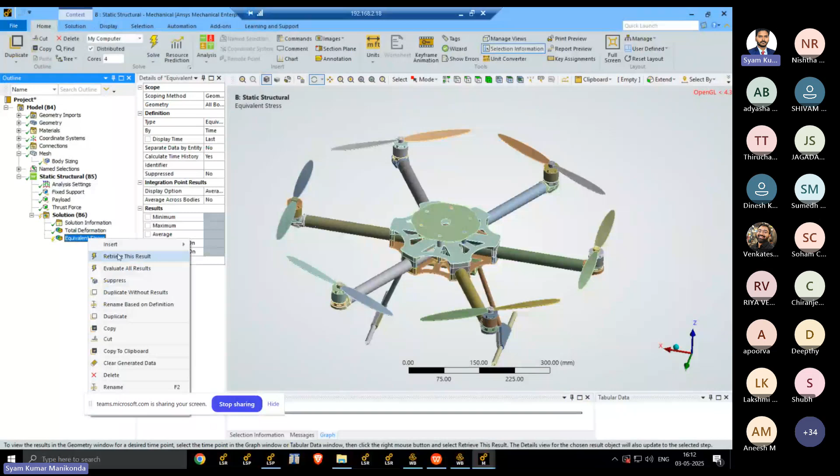Now, once the solution is done, you have to identify what is the total deformation, and you can see the stresses. Based on the generated stress, we can see whether we are in the safe region or not. So I'll ask to evaluate the result, this one also I'll ask to evaluate the result. So generally these are the two things we generally select.

Total deformation, now you see the total deformation in the entire model. The total deformation of the entire model is, in mm units, 0.13. Now I'll show you this in the front view. Now you can see the animation here. But that is not the realistic view.

So what I'll do, I'll switch to the results. There in the context results, I'll go to the true scale. So true scale, and you can see the mm, so 0.1 mm. From your naked eye, you can't see the deformation. So it will be like this, you can't see the deformation with the naked eye. So that is a true scale, that's why you're unable to see it.

If I exaggerate it, now you can see some animated view. So with the force boundary conditions and displacement boundary conditions, you can see there won't be much deformation. You can increase the payload also, and accordingly the thrust force also you can increase. At 12 kgs it is safer because you can see the deformation is not much, it is not a high value, 0.1 mm. It's a considerable thing only.

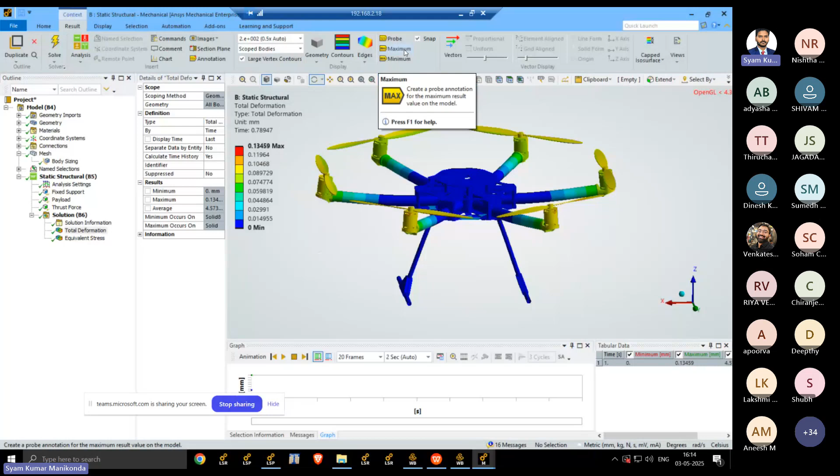And from the probes, you can see the probes there, probe maximum and minimum. So where is the maximum deformation and minimum deformations? We can see it from the same GUI.

So you can see where is the maximum deformation, it is occurring at the thrust generating parts, so that is at the motors. You can see the maximum deformations happening, and minimum deformations will be, obviously, at the fixed supports. Fixed support means the bottom parts, we selected the bottom parts as the fixed supports, that's why zero deformation is happening at the bottom supports. So maximum and minimum deformations we have seen using the probe options, maximum probe and minimum probe.

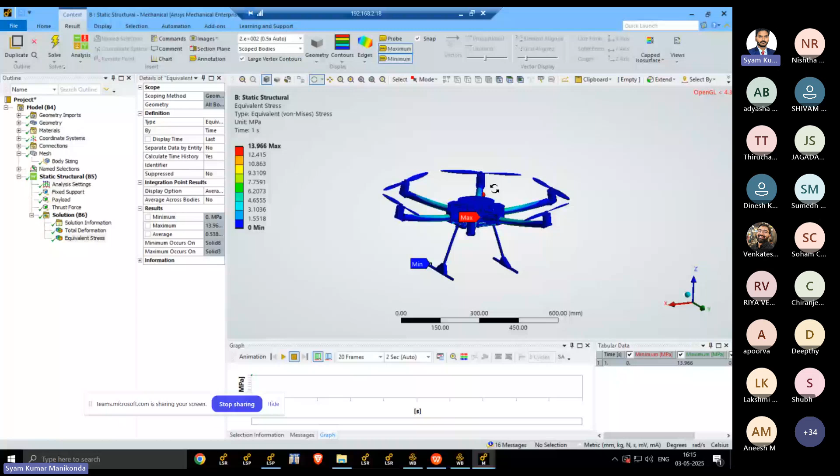Then again, coming to the equivalent stress. All the parts are made of aluminum or aluminum alloy. Now you see the maximum stress generated based on the payload and thrust force. So maximum stresses generated are 13 megapascal. You can see the units here, megapascal, 13 megapascal. So where is the maximum stress occurring?

So you can see maximum stress is occurring at the support side, that is payload, where we applied payload, right? So at that particular region, you can see the maximum stress occurring, and that too the maximum stress is, even you can see that is 13 megapascal.

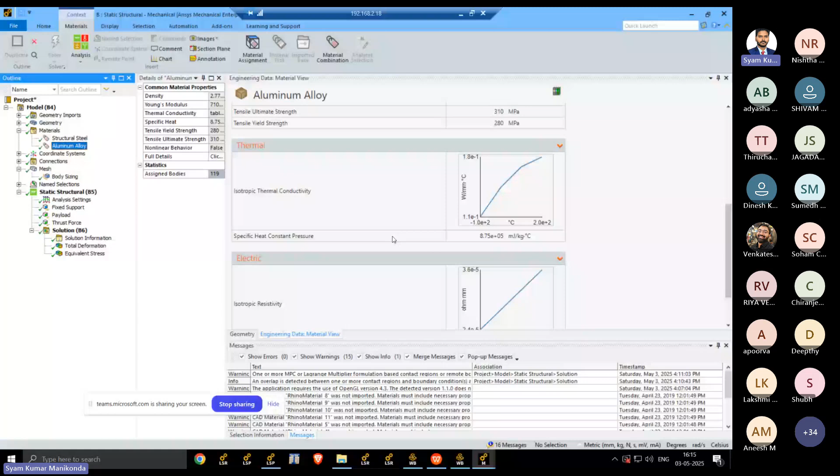How we can say whether the model is safe or not? So the maximum stress is 13 megapascal. Now we'll see the material is aluminum alloy, so what is the design point of the aluminum? Now I'll go to the aluminum alloy. Now you see what is the design point for the aluminum alloy, so yield strength or yield point is our design limit, so 280 megapascal. Aluminum alloy is having 280 megapascal. Now what is the equivalent stress, what is the maximum equivalent stress here? The maximum equivalent stress is 13 megapascal.

We can go up to 280 megapascal also, because the yield point is 280 megapascal, so we are in the safer region. You can see 13 megapascal is the only stress generated. So you can say it's on the safer side. We are on the safer side. Any doubts on this one?

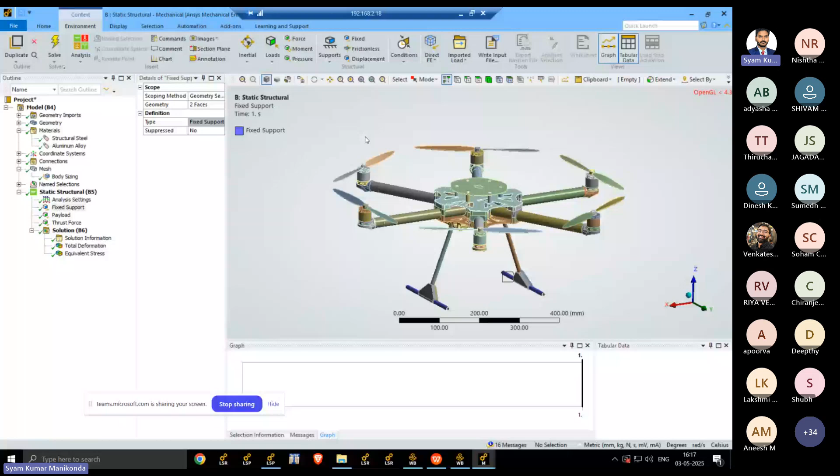We just showed you the static structural analysis. Static structural analysis is done to identify the structural integrity when it is in the stable situation. So that means what is the realistic deformation and realistic stress it will develop when it is in the flying mode, with the thrust force of 60 newtons on each and every motor, on having a payload of 12 kgs on the bottom. When this situation is happening in reality, what could be the generated stress and what could be the generated deformation when it is in the flying mode?

If you have this kind of configuration with you, I just gave you the appropriate displacement. Why? Because if I don't give any fixed support or any boundary conditions, the problem will not be solved. Why? Because Ku equal to F is the equation. If I don't give any defined displacements here, it won't show you any values.

It is just a representation to see what is the deformation and what is the stress generated when the payload and the thrust force are acting on the object. In that situation, it is just a representation to replicate what could be the displacement and stress generated. I just gave you the fixed support. It is not a realistic case, that's true. But what I'm telling you, when you have the thrust force, when the object is in the rest position, do you think there will be any thrust?

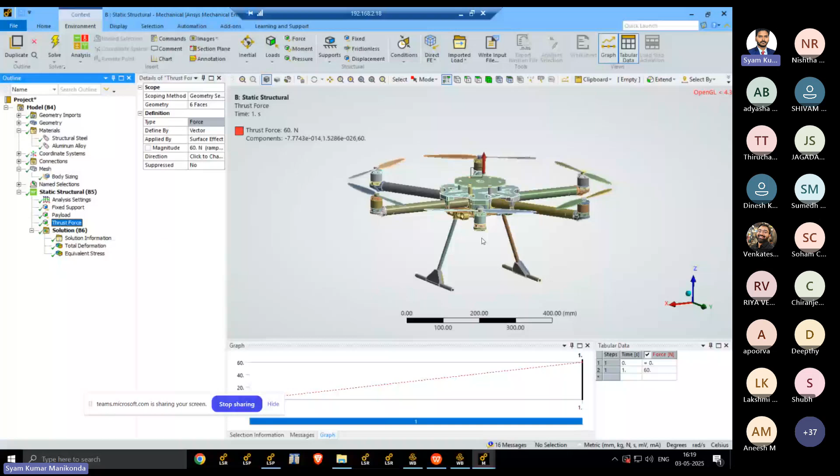When the object is in rest position, there won't be any thrust force, right? It is just a representation. When the model is having 60 newtons generated thrust on each and every motor, and the payload, that is 118 newtons only, if you imagine, it will be in a flying condition only, right? With that given thrust and payload, it won't be on the ground. So I'm just showing you with respect to the bottom landing positions. I've just given the displacement because if I don't give it, it won't be solved.

Yes, understood sir. It is just a representation to show you what is the stress and what is the maximum deformation that occurs when this is in the flying mode. In the flying mode, it will have the thrust of 60 newtons on each and every motor, and the payload is 12 kgs.

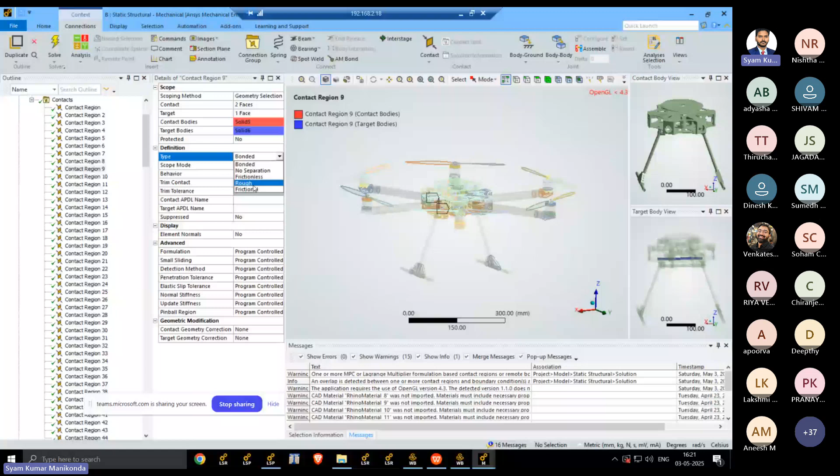Because of that, to handle those things, we have to stick to the iteration methods. Direct methods won't work there, so I have to select iteration methods. I can control these using the analysis settings.

There I can go to the auto stepping method and change it to on. Then I will give the number of substeps — minimum number of substeps, maximum number of substeps I will define. That means I will define the iterative solution steps. These things will be active when you are solving a nonlinear structural problem.

Am I clear? Yes, sir, that's clear. Thank you. Right now what I showed you is only the linear static structural problem. That's why I did not operate anything on the analysis settings. If I am doing a nonlinear problem, then only I will define these substeps, and accordingly I will identify them.

Okay. Yeah, okay, hello? Then yes.

Sir, I wanted to ask about the meshing. I have faced a similar problem. The designer is a different person, and I'm the analyst, and the designer doesn't know anything about Ansys. So he doesn't know where the problematic body is, nor do I. So can we identify the problematic bodies in Ansys that are creating problems for meshing?

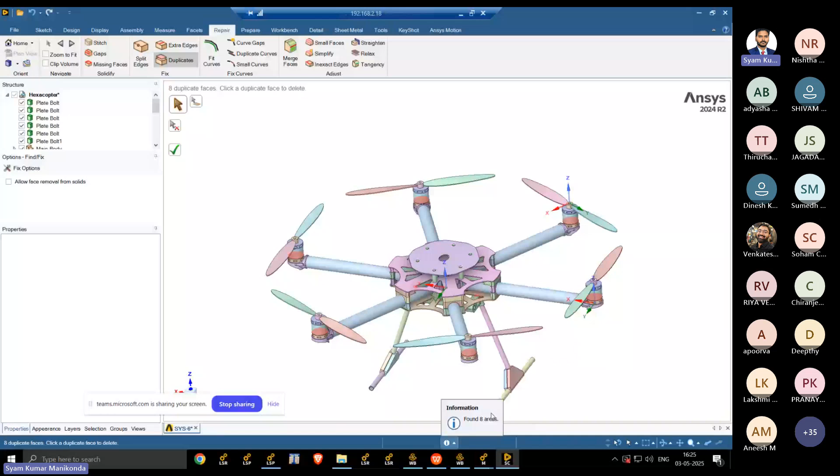But what I am telling you, don't do it directly. It is just one way of fixing your duplicates using the algorithm provided by the software. But the problem is, don't rely on the fixation based on the algorithm — sometimes it will give you a non-realistic fixation. Always, once you fix it, you have to ensure it has reached the proper connections. Now you see, by selecting this one, it is not able to fix anything.

Sometimes it may fix, sometimes it may not fix. But always ensure once it is fixed, that it is having the proper geometries and proper connections. So ANSYS Space Claim or Discovery has these two options, prepare and repair. There you can identify those geometry cleanups and perform geometry cleanup options by means of prepare and repair.

So while putting the force of 60 Newtons on 6 surfaces, will it be equally divided, like 10 Newton on each? No. On each and every surface, the full 60 Newtons will be generated. It's not a dividing thing, it won't divide. So totally it will be 360 Newton now.

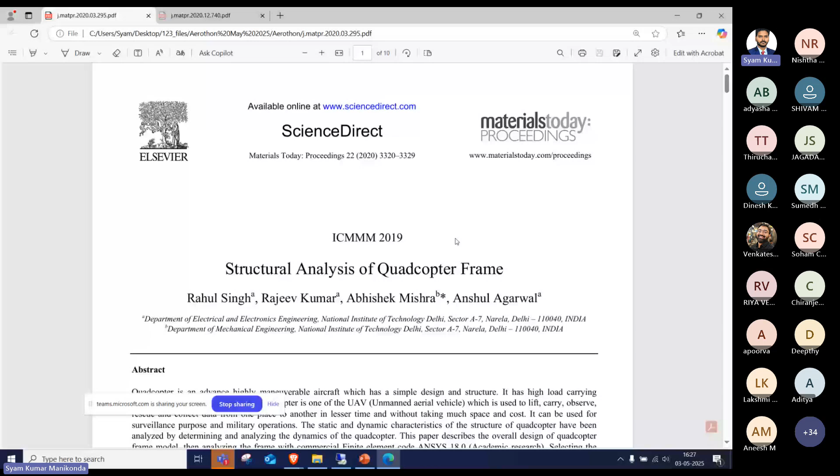So the first demonstration is done. Now we saw stresses and deformations and confirmed whether it is in the safe region or not. Now coming to the modal analysis. On the same model, we have to do the modal analysis, with the same settings and payload.

Now coming to the loads and boundary conditions. Since it is a modal analysis, you don't need to worry about giving structural loads, whether it is a thrust load or payload. Don't give any structural load, only give the boundary condition, fixed support, and see what is the modal behavior or mode shapes of the hexacopter. Just remember, no structural loads should be given in the modal analysis.

So what I will do, I will select the same geometry, that is B analysis I'll take. I will select a new analysis here, and I'll select the modal analysis.

So engineering data, I will drag and drop it and connect it. Geometry, I'll connect it. Model also I can connect it - it's not giving, but what I'm telling you is you can drag and drop the analysis and connect the relevant information. And if you remove it, the connections will be broken, but the data will still be retained.

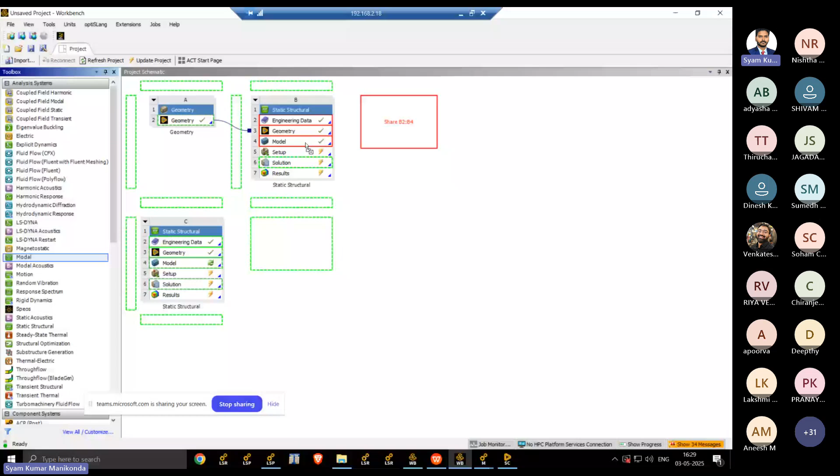The other way would be calling the analysis from the same mechanical environment. So this is the B system. Since I have selected the analysis system, I have disturbed it, that's why the solution has been disturbed. So you need to solve it again to see the results properly, but anyway, what I am showing you is the modal analysis.

So I'm inserting the modal analysis here in the environment. Since I'm not using the static structural data, I've just hidden it. Now in the modal analysis, it will take all the information from the previous steps - it will take the geometry, the materials data, the connections, the meshing data. Only that it will take, what else do we have to give?

Now if you see, we just need the same set of pre-processing stage. So modal analysis requires the same steps as in the pre-processing of the static structural analysis, except we should not give any structural loads, but we have to give the fixed support. Since I've used the same data from the previous analysis, in the processing stages I should not give any structural loads, only fixed support, and I will see the results - natural frequency and mode shapes. Those two things I'll show you.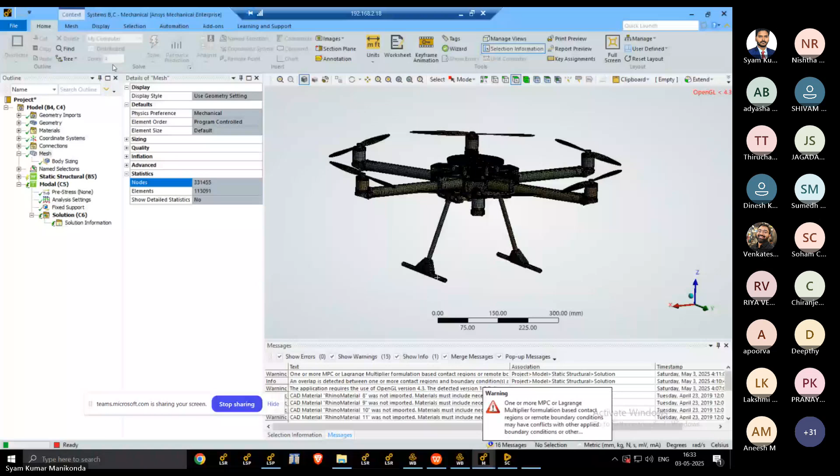Hopefully you are aware of modal analysis. What is the objective of modal analysis? Modal analysis is done to identify the natural frequencies. Once you identify the natural frequencies, we will take care such that the external force excitation will not have that natural frequency. So modal analysis is done to identify the natural frequencies and the corresponding mode shapes. Once the natural frequencies are identified, we will ensure the excitation frequencies should not match with the natural frequencies of your model. We already know what will happen: if the excitation frequency matches with the natural frequency, then resonance will happen, and that will lead to catastrophic failures of your model.

Now I have asked to extract 20 modes, so you can see those 20 mode frequencies. These are the frequencies of your model, starting with 11 hertz up to the 20th mode having 112 hertz. So these are the natural frequencies of your model.

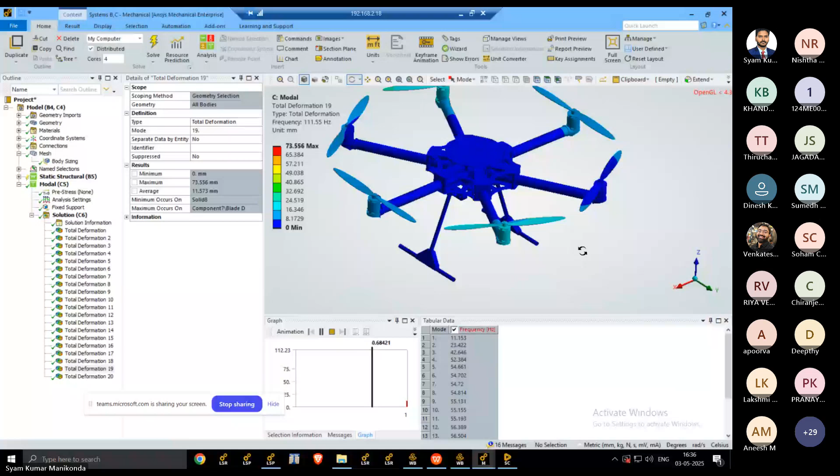So the objective of modal analysis is to identify the natural frequencies. Now you can see in the 19th mode shape, the arms of the motors are having the deformations. These kinds of mode shapes correspond to the natural frequencies, and we should avoid these frequencies while having the excitations.

Excitation means a repeated load. Let's say the motor is running with some RPM — the frequency of that motor RPM should not match with any of the frequencies shown here. That is a criteria we need to take care of. So that is about the modal analysis. Any questions? These are the modal analysis mode shapes and the corresponding natural frequencies.

Okay, so these are the two demonstrations we planned for you. The first demonstration is on static structural analysis of the hexacopter, and the second is the modal analysis.

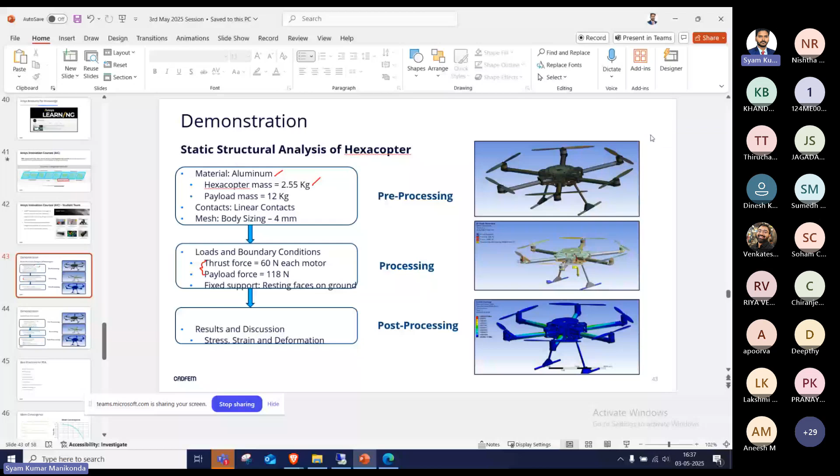Okay, so with this, the demonstration side is done. Then I will take some 10 minutes to showcase the best practices generally followed in the industry.

So best practices, if you see, there are a set of best practices. The first one is mesh convergence. Right now we have included the 4 mm mesh size in our model. So whether the solution is correct with respect to the generated mesh, that can be taken care of by using the mesh convergence study.

So by increasing the number of elements, the body element size, you try to reduce it to 2 mm, 4 mm, 6 mm, 8 mm, 10 mm. Do the analysis with respect to the different element sizes and plot the stresses. If the stress plot is a horizontal line, then you can say the mesh is convergent, and the mesh convergence study has been reached. So what you have to do is vary the number of elements and redo the analysis, so that the results should be independent of the mesh. That is the main aspect of doing this mesh convergence study.

So mesh convergence study we have to perform, so that the results, whatever they are, should not depend on the type of mesh you're using. That is the mesh convergence study we do.

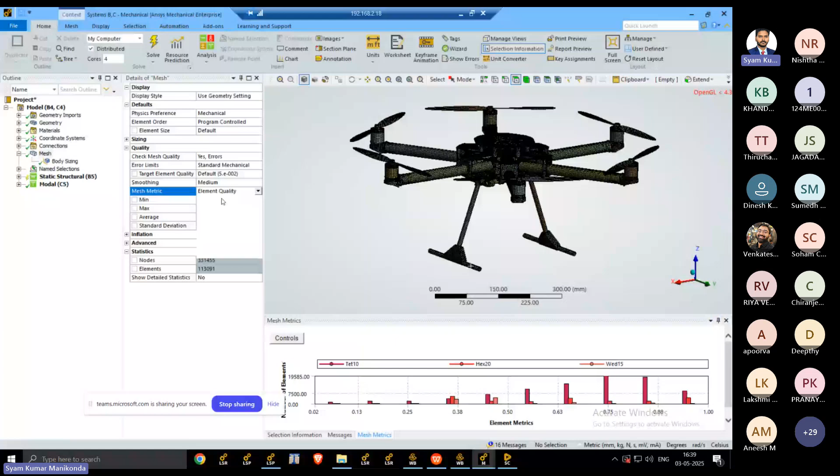So you just check the element quality. Now you see the element quality of the mesh generated here - if you look at the elements, the element quality is varying from 0.016 to 0.99. Ultimately, to have a good result or a better analysis, the element quality should lie between 0.2 to 1. Since the elements are falling at 0.016, you have to update the mesh such that the element quality of all elements falls within 0.2 to 0.99.

Just remember this: element quality should fall between 0.2 to 0.99. Right now the mesh generated has 0.016, meaning the element quality of a few elements is not within the limits, so you need to update the mesh accordingly. That is about the element mesh quality - ensure that your mesh metrics and quality lie within the limits mentioned, with element quality falling between 0.2 to 1.

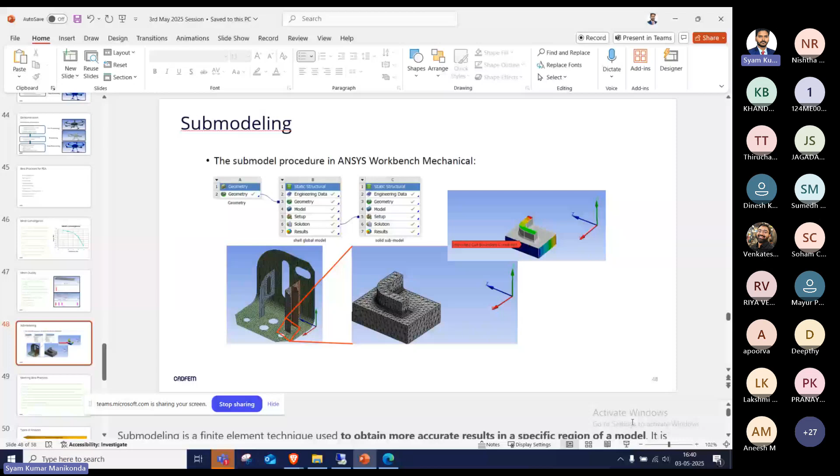Then again, submodeling. If you have a complex geometry, sometimes there's a welded region, or otherwise some proximity between parts. For those kinds of parts, you can separately do the analysis by creating submodeling sections. Let's say if you see the figure, there's some particular area - if you want to see the results on that particular submodel, you can select that area, select the submodeling sections, separate the part on that focused area, and then do the analysis again. That is about the submodel.

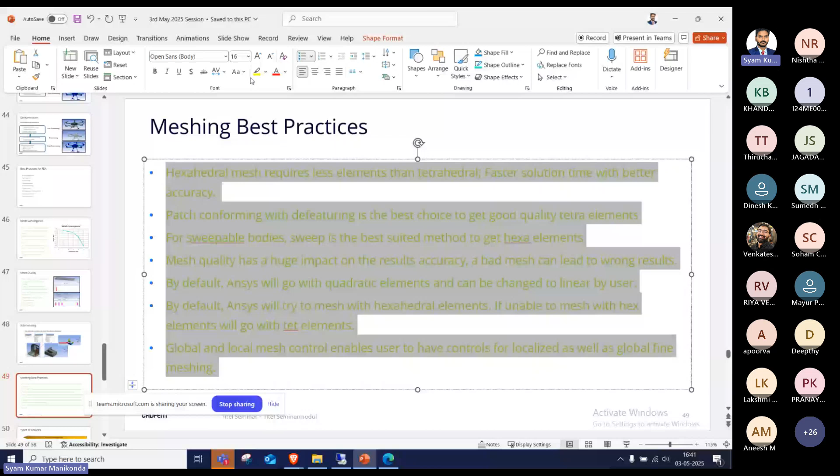Then other meshing best practices are there. So always try to have hexahedral mesh, since hexahedral mesh requires fewer elements than tetrahedral. This is one of the meshing best practices.

If you see the previous mesh I showed you, it has a mix of three different types of elements - tetrahedral, hexahedral, and wedge elements. So the point is, if you have hexahedral elements entirely in your model, that will be a good thing, because hexahedral elements will take fewer elements compared to tetrahedral elements to capture a particular area. Next, again, sweepable bodies.

I think I should not spend much time on this, because all these things you can understand only if I show you the corresponding examples. Each and every step I have to show with an example, then only you can understand. So quickly I'll cover these things.

If you have sweepable bodies, sweep mesh will be the best option. So if you are having sweepable bodies, you have to go to the local meshing option of sweep mesh. So that's one thing.

And mesh quality, I told you already. For element quality, it should be within 0.2 to 0.99. If you are having less than 0.2, it will show some impact on your analysis results. It has a huge impact on results accuracy, and bad mesh can lead to wrong results. Right now I just showed you, we have elements quality, a few elements having element quality of less than 0.2, so because of that there may be some wrong results possible.

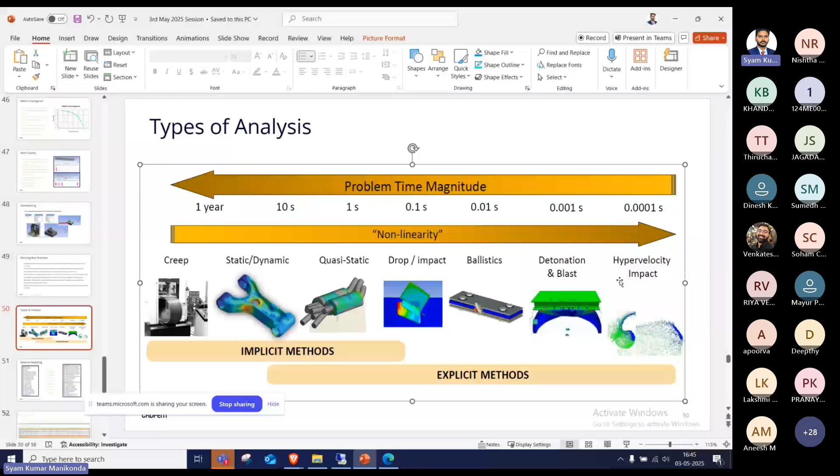Then material modeling. Just now I showed you the isotropic elastic material, because aluminum alloy is an isotropic material, and it is a linearly elastic material. Otherwise, if you are having composite, it could be an orthotropic material. So accordingly you can select the corresponding material. For elastic material you can select plasticity, creep, viscoelastic, and additive manufacturing materials also we showed you, like titanium Ti-6Al-4V. So those kinds of materials you can wisely select according to the needs of your model.

Then there is another option, adaptive convergence. It is similar to mesh convergence, but right now I can't spend much time here. This is one way of doing convergence studies, mesh convergence studies we can do. So instead of remeshing every time, you can do this adaptive convergence on the post-processing side.

Once you have the equivalent stress, you can insert the convergence criteria by simply right-clicking on that particular stress component. So let me just show it in the here itself.

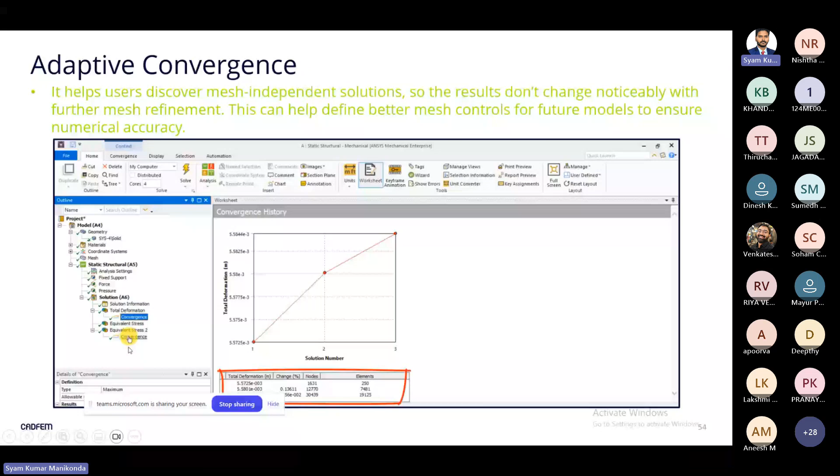So let's say you have the stress with you. In the stress, equivalent stress, right click, insert, and there you will have the convergence option. You can set the convergence limits here. With setting these limits, you just run this step and you will get the adaptive convergence, depending on different factors. You can see it here from the figure, different numbers of elements are there, by having the variation of 20% of the equivalent stress, you can have the adaptive convergence.

So what it says is it helps users discover mesh independent solutions, so the results don't change noticeably with further mesh refinements. So let's say if I keep 20%, that means the results will not vary more than 20%. Based on that limit, it will do the automatic or adaptive convergence studies.

Then again, parametric studies. As I told you in the initial slides, this is the last cell of the analysis. If you define the input parameters and output parameters, then you can have the option of doing the parametric study. Let's say if you want to change the payload - we just kept only 118 newtons. If I want to change the payload, if I want to give a multiple value of that magnitude, let's say 2 into 118, or 3 into 118, or 20 kgs, 30 kgs, or 60 kgs, what I can do is define the parameter here. Simply I select the parameter P.

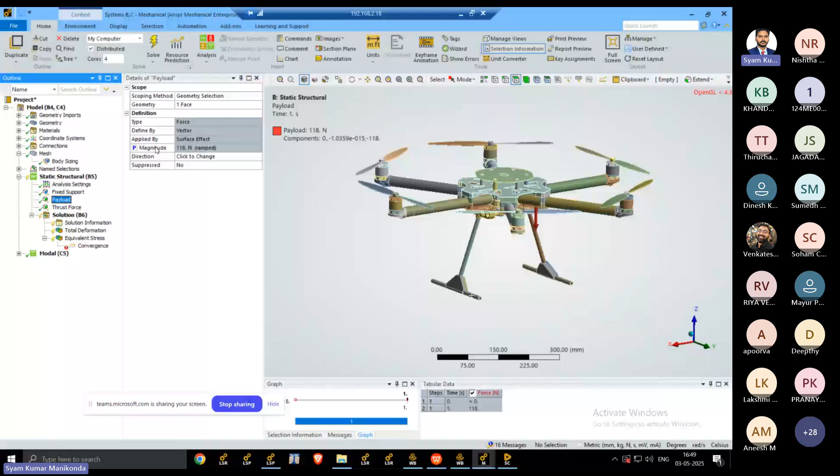So input parameters you can give are material properties, mesh, geometry, loads, point masses - these are the input parameters. And output parameters you can identify are stress, strain, deformations, and you can do the parametric study. So with a single click, you can do the parametric study. Once you set the entire analysis, define input parameters and output parameters, and conduct the studies, you can see the variation of the input parameter with respect to the output parameter. So that is about from my side.

So if you have any queries, we can discuss here now. Please feel free to unmute yourself if you have any further questions. Actually, there was one question, Syam, which asked if we could probably mention 3 or 4 common mistakes that people make when simulating multi-rotor drones, and any way they could avoid them while simulating - any 3 or 4 critical pointers, common mistakes that people make.

Common mistakes - a few people already mentioned some, right? So while generating the mesh, they have some issues. What they can do is, once you import the model or once you create the model, always do the geometry cleanup using SpaceClaim or Discovery, as I already showed you. So repair and prepare steps are there, and we have multiple options in those two steps, so accordingly we can identify duplicate faces. So geometry cleanup you need to do - that's the first thing. The second thing is generating the mesh.